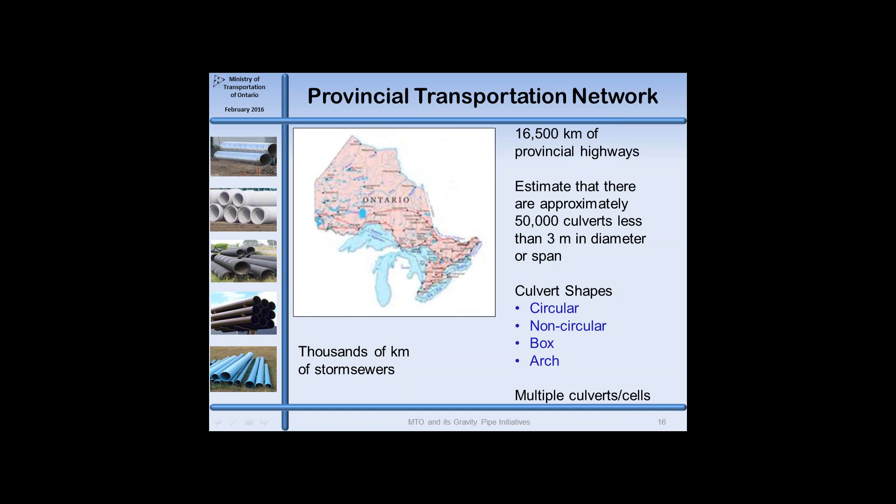From our perspective, what we saw in the past—and I'm going to be talking from about 2002—we started having some issues with pipes across the province, regardless of material. For steel pipes, we were seeing corrosion, deflection, buckling, collapse, and similarly with concrete pipe, we saw cracking and the odd spalling issue, as well as breakage from other pipe products and buckling. Some of the work done at the inlets and outlets was not done in context of looking at what the hydrostatic uplift forces were, and so we had some buoyancy issues with uplift.

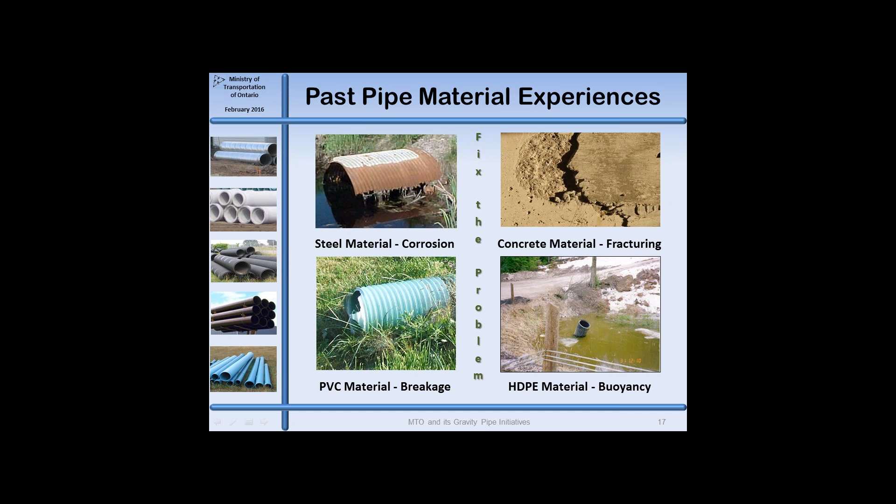Running through quickly, a timeline of the past decade or so in which we've been working in our gravity pipe area: in 2002, as I was starting to say, we identified a number of problems with certain steel and plastic pipe materials, and at that time, senior management at MTO put down a moratorium on the use of these particular products until we could get more information. Later in 2002, the plastic products were permitted for installation again, and in 2003 was the first study we put forward to start developing our gravity pipe design guidelines.

In 2005, our first step of implementation was an interim implementation in 2006, and at that point we started permitting steel pipe use back on our highways. In 2007 we went through the process of implementing the full gravity pipe design guidelines.

Along with that, for those involved in contract preparation, we also introduced contract specifications. We had new construction specifications, material specifications, as well as new coding we could use on contracts to ensure alternative options were available to contractors and easily understood.

In addition, in 2008, we developed a series of highway drainage design standards, dealing with anything from surface drainage requirements to storm sewers, culverts, and also bridges and stormwater management works.

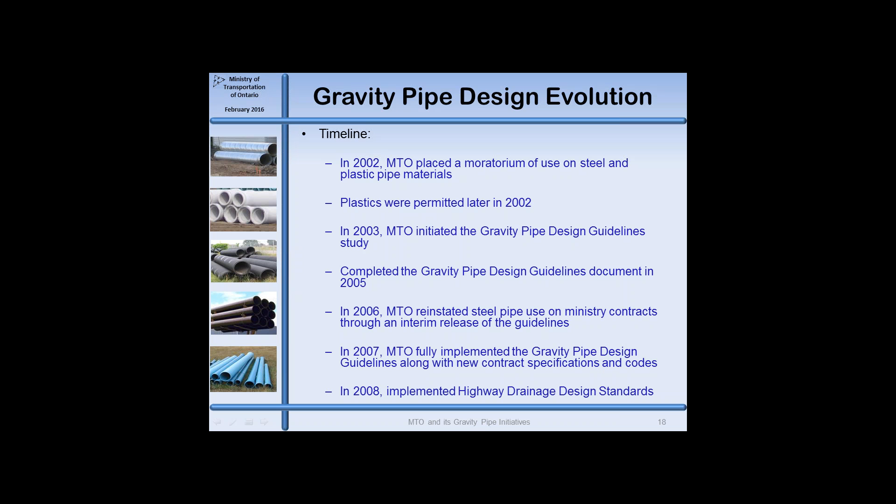In 2009, we went a step further and introduced certification requirements on all pipe materials. That was our first step to ensure we were going to get quality products.

In 2009, we also started looking at, okay, we have installation happening, but how good is the installation? So we developed installation acceptance standards.

We went through a study in 2011, looking at new information and new science that had come forward in the gravity pipe design area, and we did revision work to our gravity pipe design guidelines, finishing that in 2014. We implemented them fully in 2014, along with some revised contract specifications, material codes, etc.

In 2015, we started another study, dealing with gravity pipe trenchless rehabilitation installation. This looks at trenchless installation methods in addition to our open cut or direct burial applications that we currently follow.

What I will do now over the next hour or so is go through in a little bit more depth and detail on some of these initiatives.

When we first started looking into the whole gravity pipe work, from the full infrastructure point of view, we identified certain fundamental building blocks. We felt that if the right designs could be produced, the right products specified, used and installed properly on construction contracts, and ultimately the right maintenance performed on these installations, we would have something fundamentally sound.

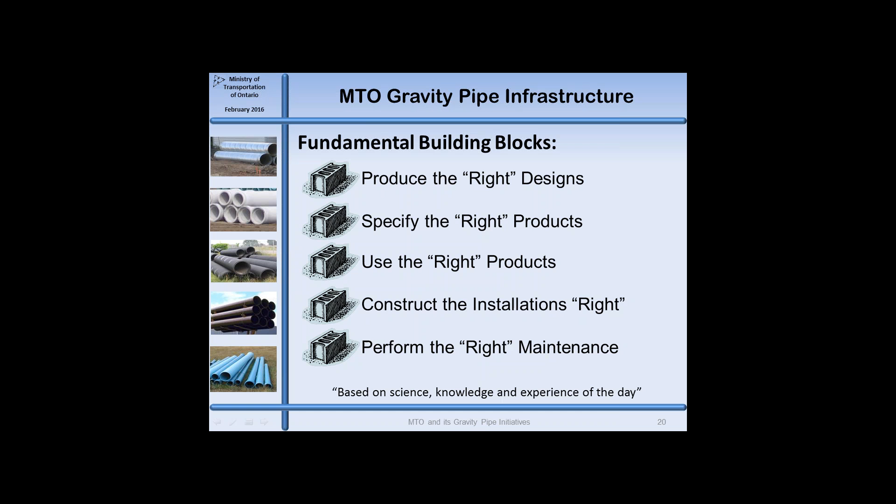So if I look at the way we were doing things pre-2007, remembering that 2007 was the first time we implemented our gravity pipe design guidelines, when I looked at the design quality block, there were certain key ingredients that came forward: our design service life, hydraulic analysis work, joint evaluation on our systems, estimated material service life, structural analysis, and any unique factors applicable to a potential site.

If you look in the second column here, which says past, pre-2007, you can see that there are some blank squares along the way. These are blank because either the work was not being done, or the activity was not being done, or if it was done, it was very inconsistent. Some projects or contracts did have it done, others did not.

When we did hydraulic analysis work, we would pick one pipe type, being smooth or corrugated inner walls, and the analysis was done based on that particular pipe. Our designers were not doing any type of structural analysis - that was left to our contractors to ultimately decide the strength of pipe required to support the highway infrastructure. Unique factors were hit and miss; sometimes they were looked at and other times they were not.

Once we moved into our contracts, we found that most contracts were putting forward that contractors would have one pipe material to install, so there were no alternatives being offered. From a certification point of view, concrete pipe materials were being certified while all the others, if certified, was done on a voluntary basis, but it was not a requirement for our contracts.

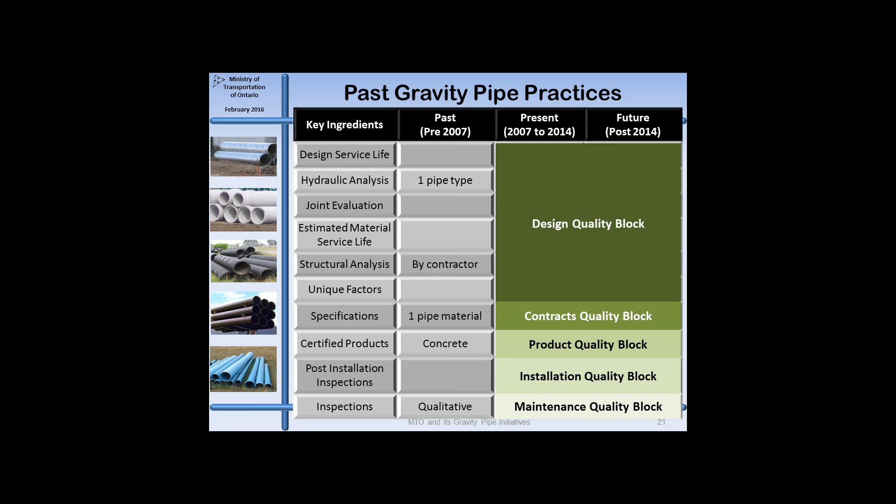Taking a quick look at SD1, this depicts the design flows for all our surface drainage systems. Based on the functional road classification on the left-hand side of this table, depending on what kind of road we're looking at—whether it's a freeway, arterial urban setting, collector, local road, or depressed road—and our drainage system type, we design for minor systems and major systems.

In most cases, our minor systems are 10-year design flows, and our major systems are 100-year design flows, with the exception of depressed roadways, where 25 years is the minor flow design. These were put forward as the level of risk we are willing to take on our infrastructure in order to maintain continuity of traffic flow and maintain as much as possible a safe environment for our traveling public on our highways.

The fundamental use of this particular type of drainage system is really to collect and move water off the surface of the highway and on into receivers.

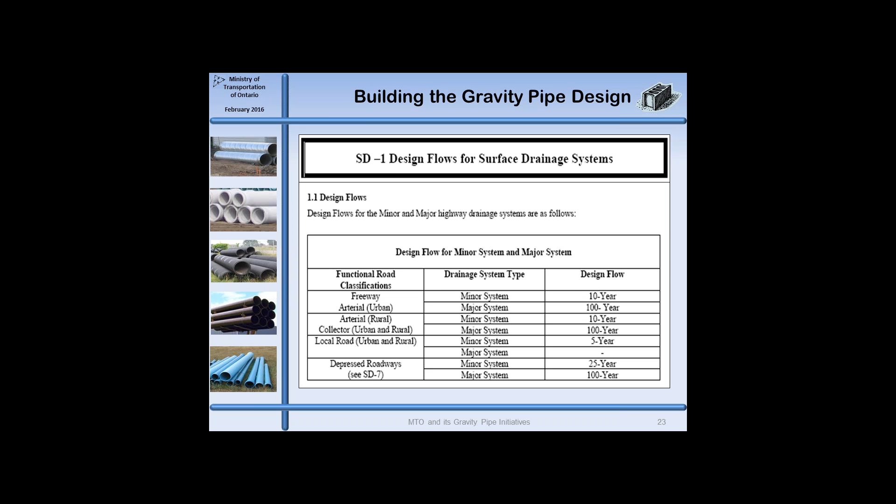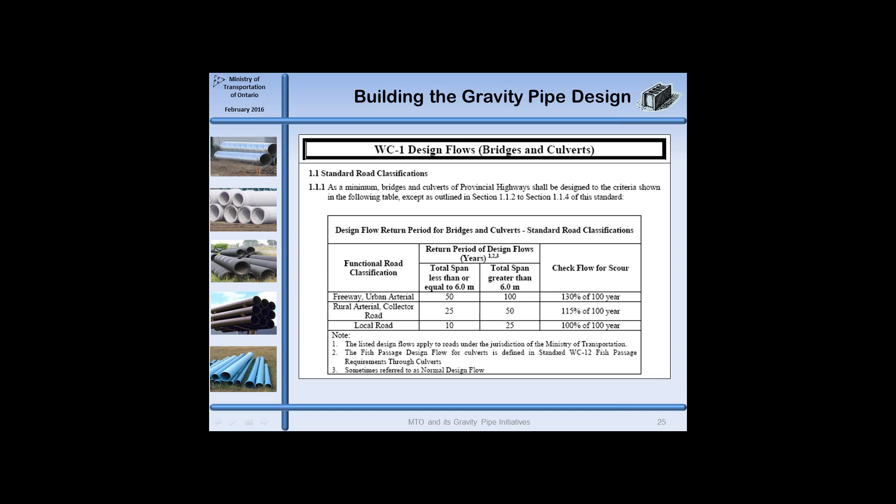That will come into play a little bit later on, and this is really to look at the pressure flows going through our culvert crossings, so we can look at potential hydrostatic problems with the culvert at the inlet or outlet, as well as the migration of waters outside the pipe walls through the embankment rather than through the pipe itself.

In 2007, as I said, we introduced the MTO gravity pipe design guidelines. It was done over a couple of years of development work in which we researched a lot of the available information and practices being done by other road jurisdictions, and came back with a complete set of guidelines for designers to follow with all our highway applications.

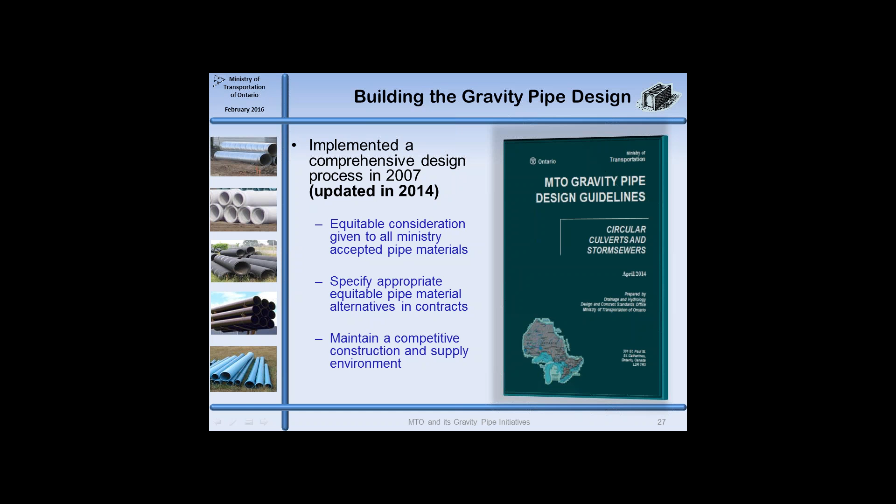Highlighting the design process itself, it goes through basically 8 steps. The first is really trying to set up what's really needed or required at a project. From here, designers will start looking at various elements of the project to set, for example, the DSL, our design service life, and other criteria.

Pipe size and type availability reflects commercially what's available for our choice to address the hydraulic conveyance requirements at any given site on our highways. Each of the pipe materials have various types of joints available, and depending on ground conditions, groundwater conditions, etc., some choices need to be made here.

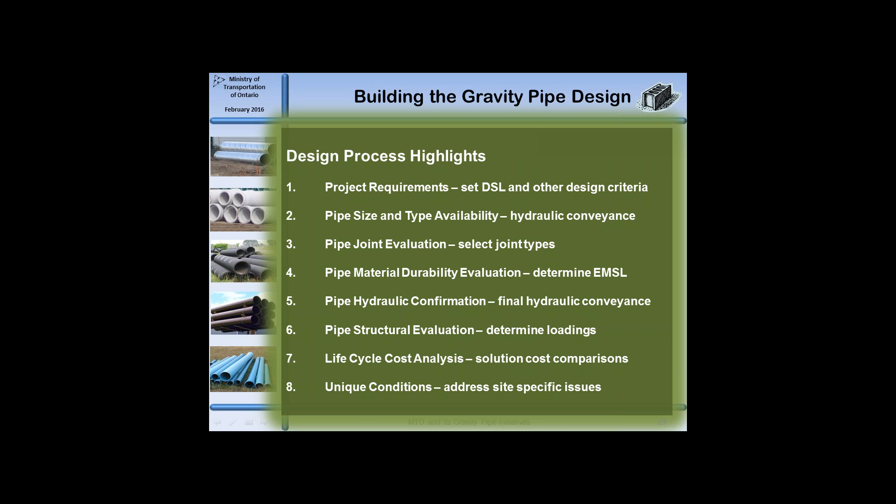Life cycle cost analysis has been introduced so you can do solution cost comparisons. Finally, writing a document like this, it's very hard to envision every type of situation we're going to run into. So designers in the end will also have to take a look at whether there's anything unique or very special to a particular site that needs specific addressment that the gravity pipe design guidelines process did not cover in itself. So, highlighting that, that's just the process.

There's also a flow chart in the gravity pipe design guidelines, which takes one step further to define or give a better indication of what's required at each step of the way. As you follow through, there are decision points: is this pipe suitable or not suitable? If not, we're not going to consider that particular product any further, and we keep moving forward with those that are suitable. Given there are a number of different pipe materials available for consideration at the beginning of the process, it's an elimination

decision process along the way from that point on. If the pipe material can deliver, it continues through the process. If the pipe material cannot deliver to a certain element, it's eliminated from further consideration. So by the end of the process, we have a complete list of all those products that are acceptable for the installation at any given site on a highway contract.

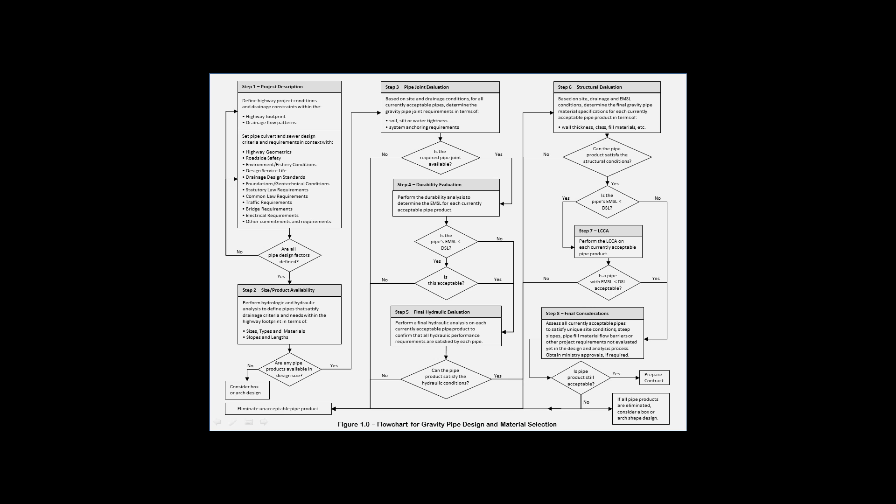Going a little further now into our step one, the designers start off with some sort of functional highway configuration, and that may be 2 lanes versus 4 lanes versus 4 lanes with a median turn lane, a divided highway cross section with a median barrier, or divided by a median ditch, urban versus rural cross section. They take all these things into account to start determining whether it's going to be serviced with storm sewers, drainage ditches and culverts, or bridges and so on.

We have in place, from a ministry's policy perspective, what we call Directive B14, our drainage management policy document, which outlines our requirements under statutory and common law. As our designers put the system together, they follow the direction from this directive to ensure that we do not compromise or cause undue hardship on other landowners upstream and downstream.

We already talked a little about our highway drainage design standards, which give us the design criteria for all our storm sewers, culverts, bridges, etc. Design service life, functionally, we're looking at 75, 50, or 25 years, and it comes back to the designers to look at the context around which design service life is what we're trying to aim for.

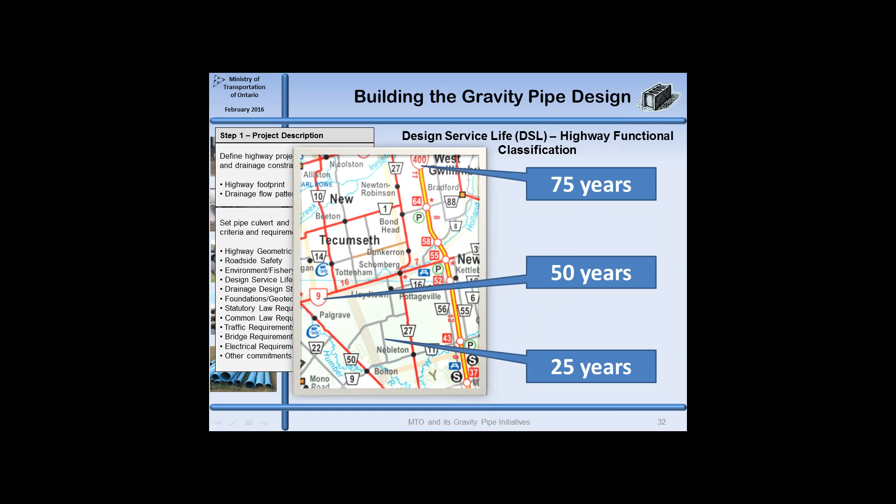First step in the process of the pipe materials is determining which pipes are going to be considered. We've looked at it from the different material side - concrete material, steel, high-density polyethylene, polyvinyl chloride, polypropylene, and aluminum alloys. These are the materials that, given the industry standards, are all applicable to either culvert or storm sewer applications under highway conditions or other local conditions, our interest mainly being the highways.

Within each one of those particular industry standards are specified other parameters with each pipe material: size, type, and class. Size is relatively self-explanatory. Type, we're really looking at two types of pipe materials - it's either a corrugated inner wall or a smooth inner wall.

From there, the class is really the material specifications. So you can start seeing that we have reinforced concrete, non-reinforced concrete, different wall thicknesses. With steel, we have wall thicknesses as well, and protective coatings of galvanized, aluminized, polymer coated, or laminated. With plastic pipes, we're moving more into stiffness, ring stiffness constant, or dimension ratios. And with the aluminum alloy product at the bottom of the table, we're looking at different wall thicknesses available.

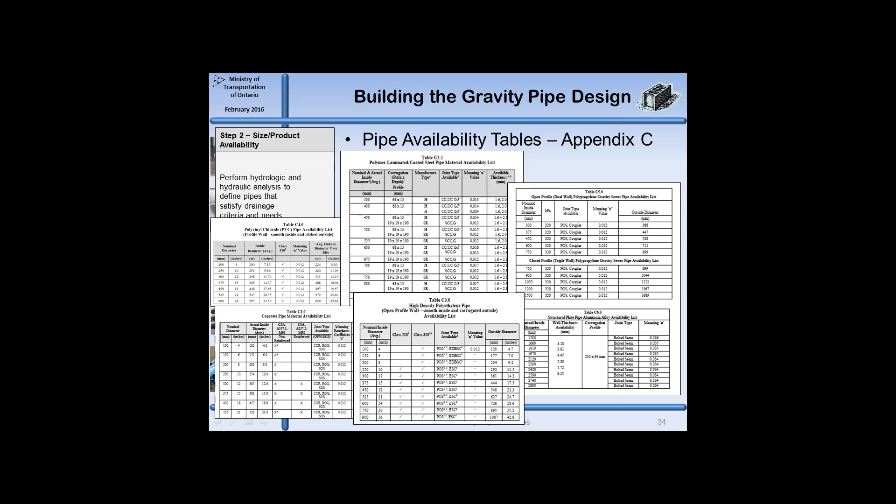So as I said, the initial hydraulics is really looking at the size and tolerance. With the different materials, you can see that we're looking at smooth or corrugated. Steel has both smooth and corrugated available, while the rest are all smooth with the exception of aluminum alloy, which is a corrugated product. Based on slope and length, we're now able to start zeroing in on the size requirements of the pipes and materials that we accept and are available for use on contracts.

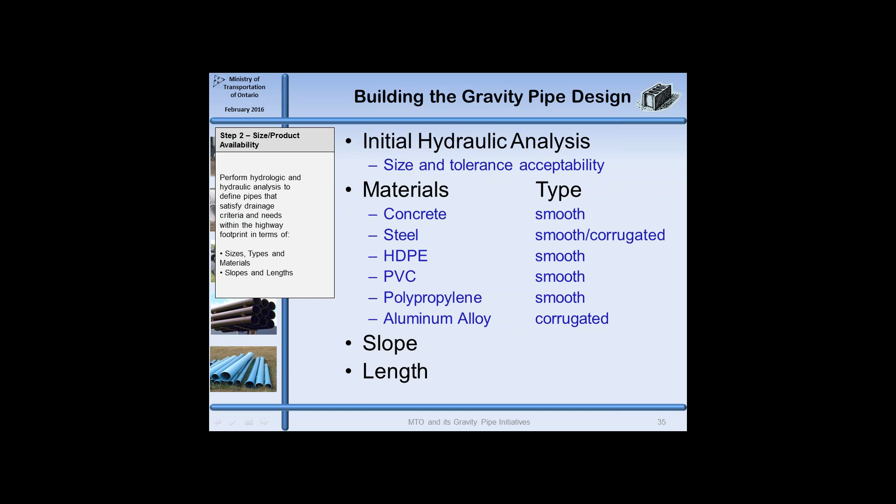Joints were the next step of our evaluation process, and based on different site conditions, you make a selection as to the type of joint that's needed. We also went through the types of joints available from every pipe product and have been able to categorize them into 3 different types: soil tight, silt or fines tight, and leak tight. The suitability of each of these different types of joints really comes about based on the site conditions encountered or the type of fill material used.

So soil tight is pretty much used in areas where your fill material is coarse with a small percentage of fines, and exfiltration or infiltration of water is not an issue. Again, where it's not an issue but you have a high percentage of fines, you can move over to silt fines tight. And finally, if infiltration of materials or water is an issue, you move to leak tight.

What we have in our process is set up so that if a soil tight joint has been specified on a contract, that's not to say that if the contractor wants to put in a pipe with silt fines tight joints or leak tight joints, that's also acceptable—unless it's been specifically stated by the designer that it's not. We'll talk a little more about that.

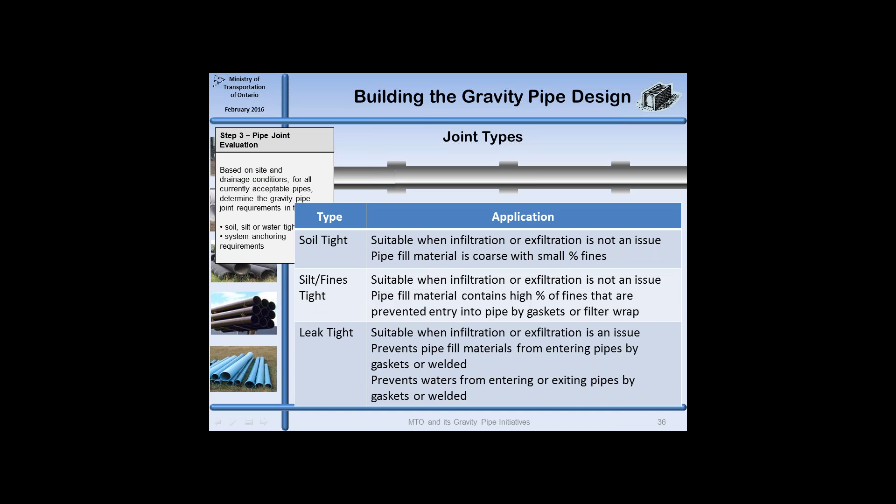Within the gravity pipe design guidelines, we again have tables available so that you can look at the different pipe materials, the different types of joints available, and what they're actually classified as—being soil tight, silt tight, or leak tight.

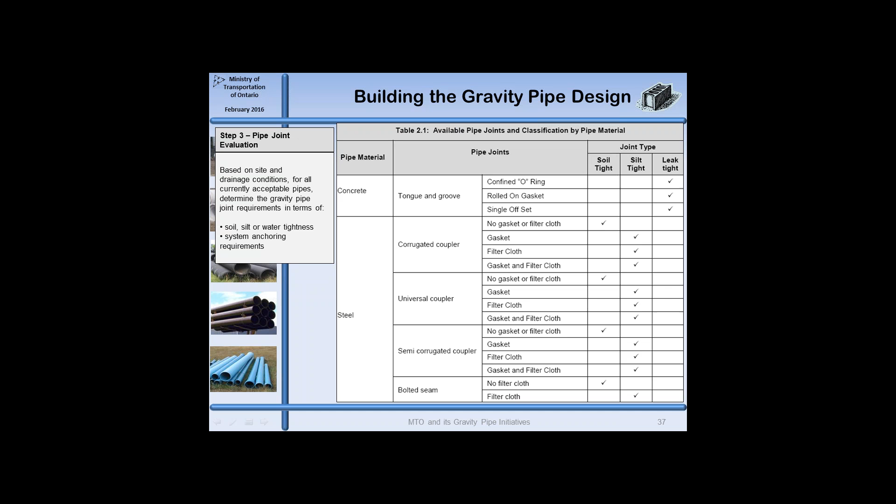Keeping in mind why the joints are there, really it's to connect the entire system, and it's going to go through some different stresses and strains as well. So really you're looking at joints that are going to provide either some resistance to something, or allow accommodation of something else.

We want to keep the pipe sections together so the joints should be able to hold every section in place. We also want to make sure it's held in place so we can maintain hydraulic continuity throughout the system. If we start having offsets, the flow regime changes, and that could have implications at the outlets.

We also want to be able to accommodate any lateral or longitudinal movement so we can prevent certain structural problems. Sometimes if we're too rigid, we may be causing further problems. If we're too slack or too flexible, we may have aggravated problems as well. So the designers need to be looking at that.

Finally, with the resistance or accommodation, you start looking at, well, if we put a storm sewer system in where the groundwater may be slightly high, we don't want to have it functioning as a tile drain and start dropping the groundwater table in an area. It would have certain environmental implications.

If we're within source water control zones, again, it's sourcing water for private well applications. We want to make sure that the waters in our area do not contaminate those sources.

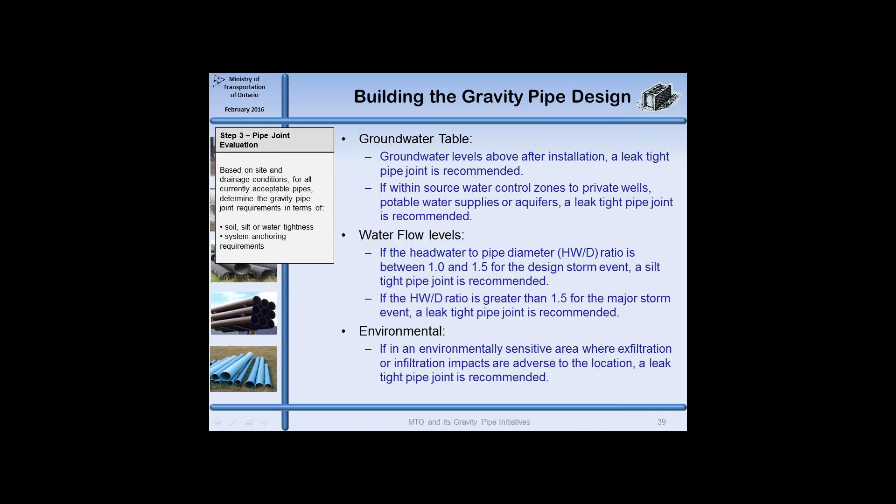Having gone through the process now, we have pipes that are of adequate size to deal with the hydraulic conveyance requirements. We've also looked at the various types of joints that we need at the site and have picked pipes now that are able to deliver to those requirements.

So the next step of the process is looking at these particular materials and the effects that are going to happen on them as far as durability. In other words, we're trying to estimate how long the material will last from an estimated material service life perspective, and whether or not that will exceed the design service life set up for each of the different site locations on a highway contract.

Various factors affecting corrosion could be the water chemistries or soil chemistries or other agents, solvents. Mechanically, there's abrasion factors, humidity and temperature potential, and the material composition to some extent as well. This is all discussed in Chapter 7 of our guidelines.

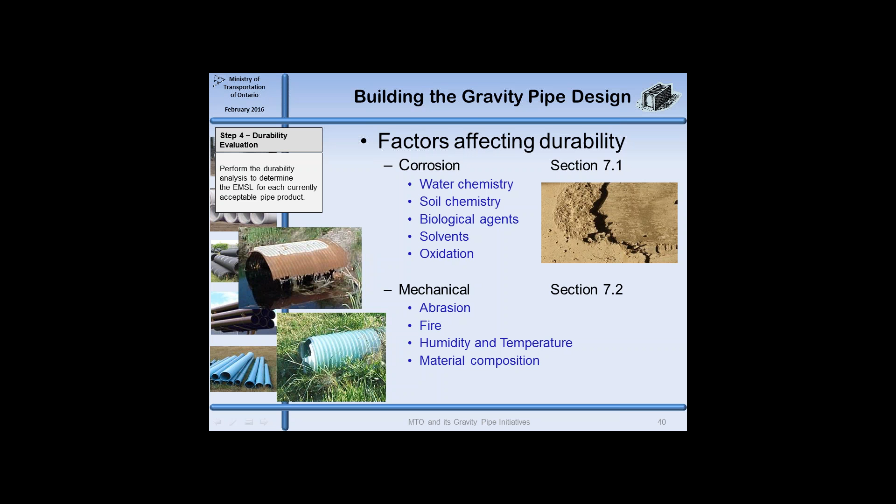Throughout Chapter 7, with the different materials, as you can see listed on the left column, our estimated material service life is either calculated or has been assigned based on information that we were able to gather. We provide guidance throughout the document through narratives, charts, equations, graphs, etc.

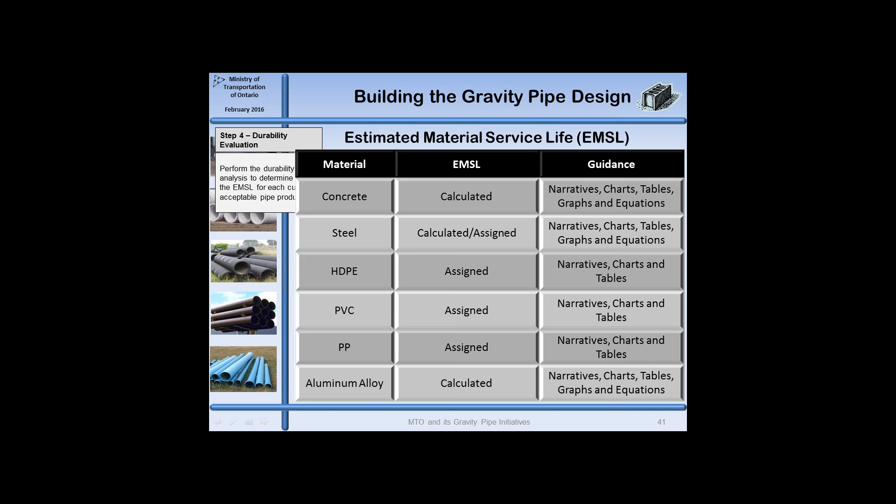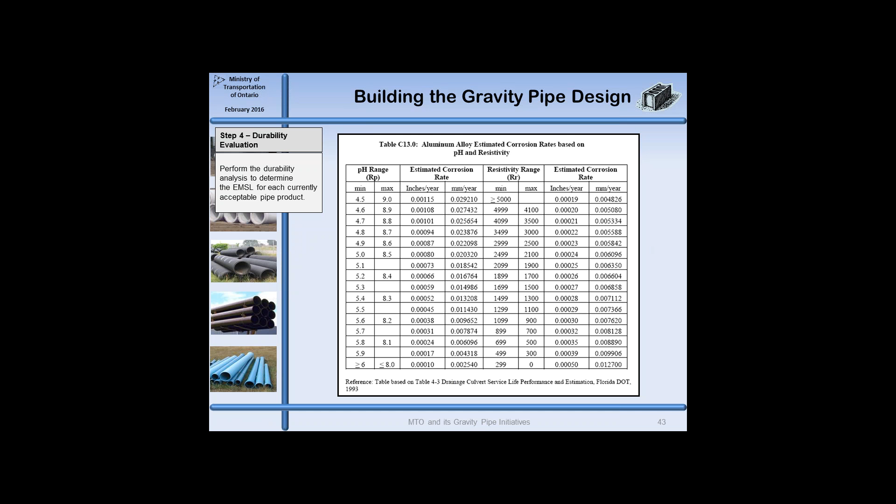This is the table for aluminum alloy, and we have estimated corrosion rates based on pH or resistivity. On the left we have the pH ranges and the estimated corrosion rates per year. On the right-hand half of the table, it's resistivity based, again with estimated corrosion rates. Given your pH and resistivity, the greater of the two corrosion rates would be used and applied to your material thickness to determine if this thickness is good enough to reach the design service life, or if you need thicker pipe material walls to deal with that.

So up to this point, we were able to carry all the different pipe materials with their various coatings and thicknesses forward. Now, through durability, we're starting to narrow those down to the types of materials required to deliver the potential of the DSL requirement.

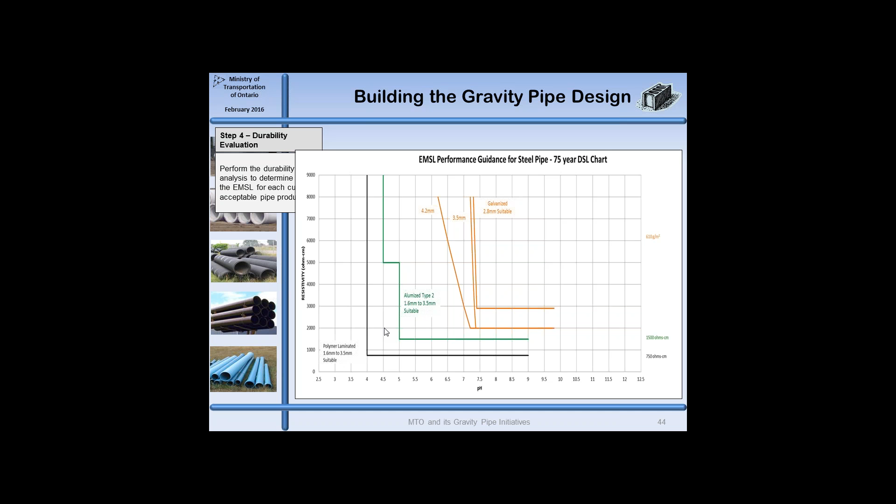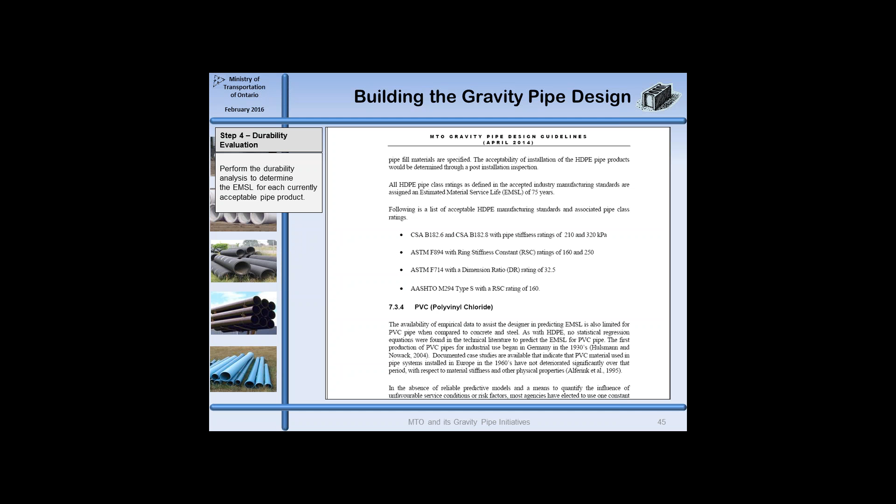The plastic products like HDPE, polyvinyl chloride, or polypropylene, based on the materials themselves and the science behind their composition, have the ability to meet 75 years. We were able to recognize that these all had good potential of making 75 years. These have been assigned 75 years and are suitable for pretty much every application on our highways from a durability perspective.

Within the document, we also provide the ability to use equations to calculate the estimated material service life. For concrete, we have four different models: the ODOT model, which is widely recognized and accepted throughout the industry and road jurisdictions, the Hadipriono model, the Hurd model, and the Florida model. These are all discussed in more detail in the guidelines in Chapter 7.

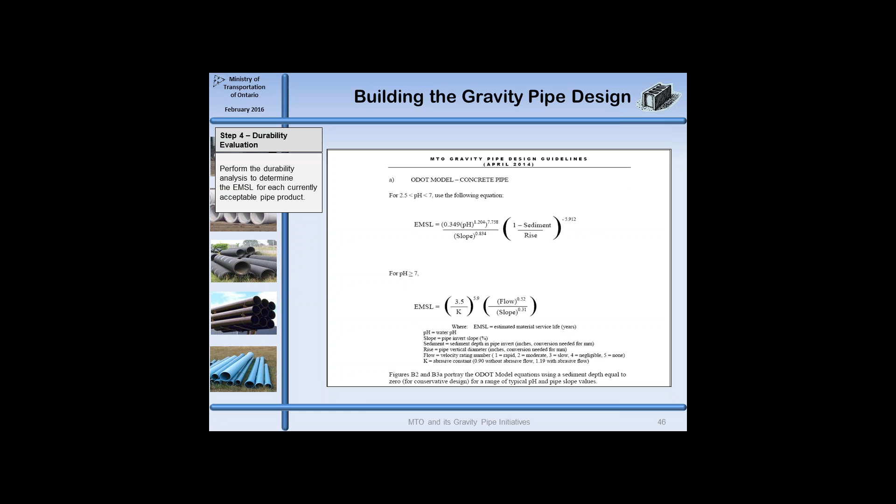What I'd like to bring out here is some additional information brought forward in the context of soils and rainfall. It helps you do a bit of correlation between what you're seeing from sampled pH, resistivity, hardness, or other environmental parameters, and correlate that back to the historical performance of a pipe that may have been in that location.

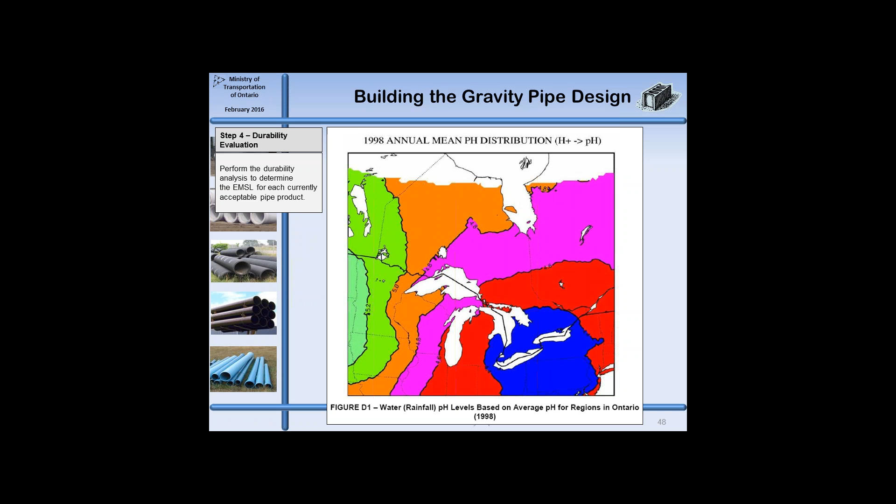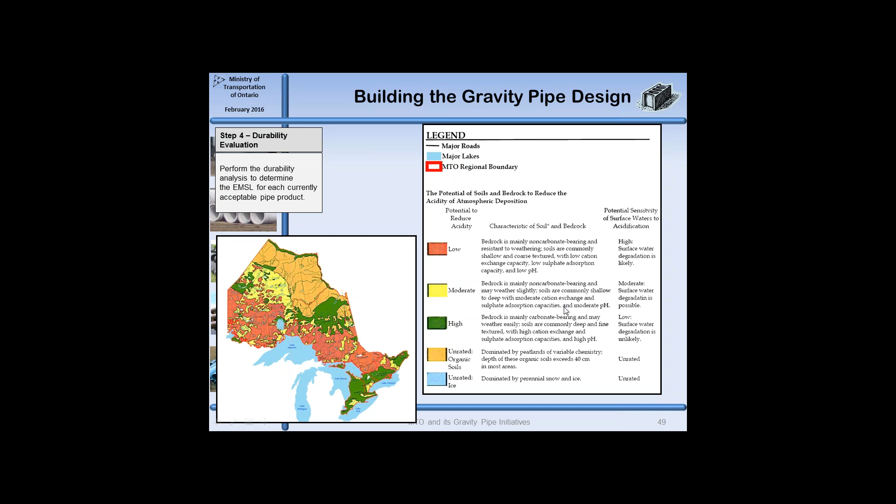So now that we've gone through the process, we have suitably sized pipe based on our initial hydraulic analysis, we have the joints, and we have the durability factors played out as far as materials go. We've been able to reach certain specifications so that wall thickness of certain pipes may not be suitable. These were eliminated along the way. So we've been eliminating non-suitable pipes all through this process.

When we reach the final hydraulic analysis aspects, as I mentioned before, there is a range of sizes available. If you pick the 1,000 millimeter category, there are various sizes available, and do they all act the same way hydraulically? For a culvert, we may have to look at low flows for fish passage requirements, and moderate flows from an erosion perspective downstream.

We have our design flows, as noted from our design standards, which could be anywhere from 25, 50, 100 year, 10 year for storm sewers, or 25 year for depressed roadways. Major flows that we have to look at are the 100-year or potentially our regulatory storm levels. We also have check flows for scour analysis, done at our culverts. This is the type of final hydraulic analysis we're looking at the designers to do prior to moving on into the structural assessment component of the process.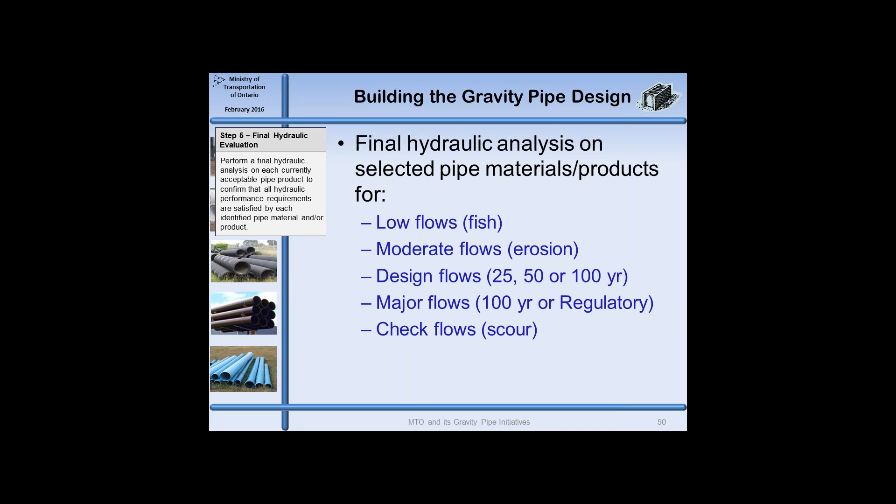So for all our designs where they have to do any regulatory analysis work, these are the regulatory storms that they would actually input into the hydraulic analysis component to look at overtopping relief flow aspects on highway crossings at bridges or culverts.

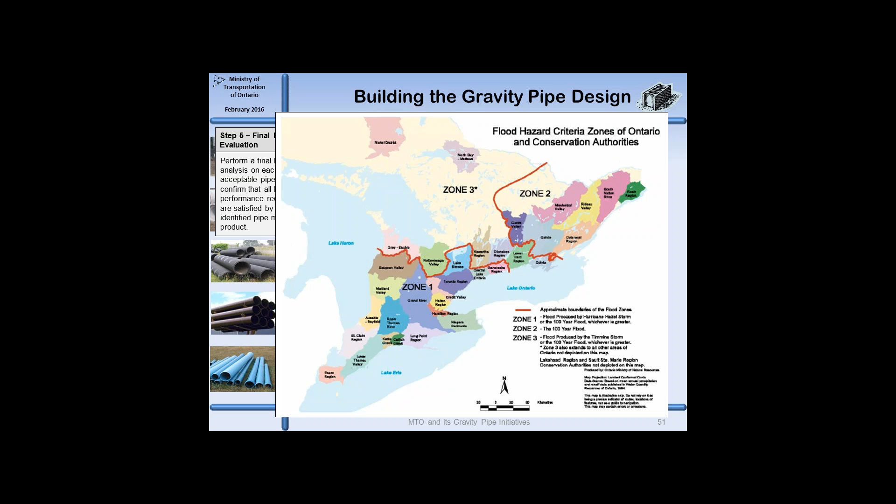Moving forward into the structural component, one of the things we found when looking at these contract specifications was that they were specifying rigid pipe and flexible pipe. Rigid pipe, in the context of designers, was any pipe with a smooth interior inner wall. Flexible pipe was anything with a corrugated inner wall. In the context of the materials themselves, rigid pipe is anything that cannot deflect more than 2% without cracking, versus flexible pipe, which can deflect more than 2% with no cracking, and will actually be able to deflect more than that 2% level.

So really when you look at a rigid pipe, it's the concrete material versus the flexible pipe, which is our steel and plastic products. In the context of installation, with rigid pipe we're looking at 3 distinct layers when contractors perform their backfilling operations: bedding, cover, and backfill, versus flexible pipe installations, which really have only 2 layers, the embedment layer and the backfill layer.

Our designers at the time were never specifying exactly what type of materials were needed for the bedding, cover, embedment, or backfill. This was all left up to contractor choice based on some level of input from the foundations area. A lot of times what we were seeing is that the bedding was not appropriate or the cover was not appropriate, and thereby we were having some installation issues and the culverts were not operating to our expectations. So we moved this forward into the design area to make sure our designers are actually looking at this and making some design decisions based on the requirements of the site.

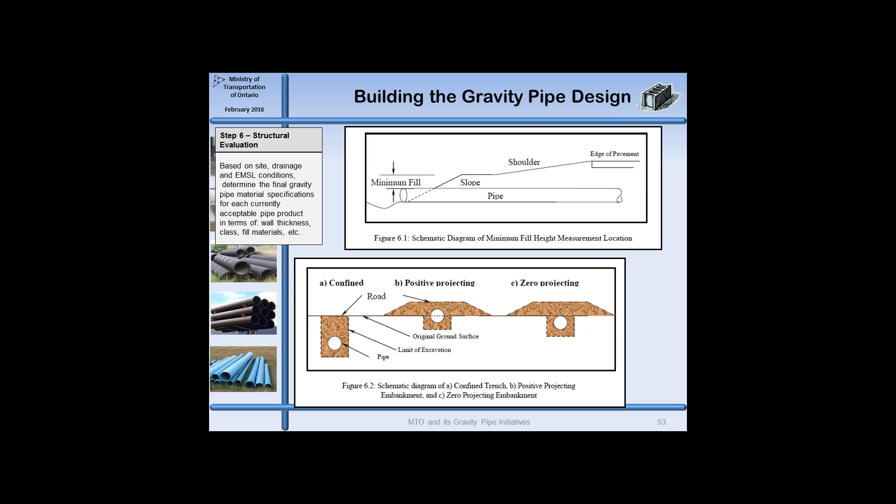We've gone a few steps further over time and have started looking at the way the distribution of loads are going across the pipes. What we're really looking at is, with any structure or infrastructure location, can we see what's the lowest level of fill that's going to be at the site, or what's the highest level of fill that's going to be at the site. We can then take a level of analysis on that, determine if we have enough fill to support not damaging the pipe, and whether we have too much fill that the pipe cannot support, requiring something different to support that.

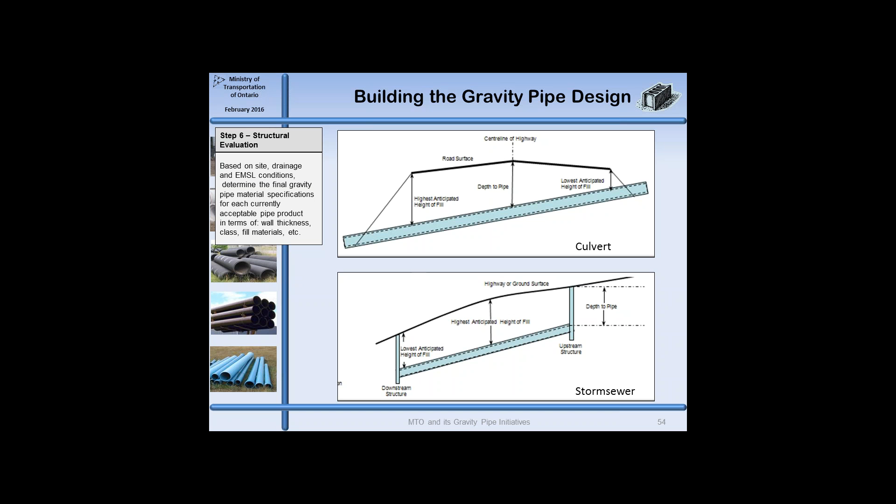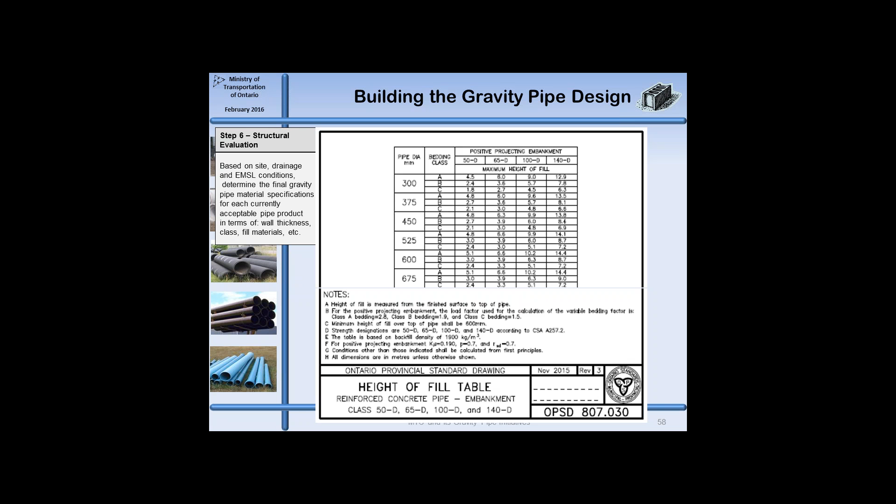Having gone through all of this and come down to a point where we have all our suitable pipe materials able to satisfy the hydraulic criteria, the durability criteria, joint criteria, and the loading criteria, we can now look at whether or not a life cycle cost analysis is needed.

What we found in our analysis really came down to the cost of one-time pipe installations compared to what we call pipe replacement or rehabilitation strategies. With a one-time pipe installation, we're looking at all the suitable materials that have come forward as having an estimated material service life (EMSL) greater than or equal to the design service life (DSL), versus pipe replacement or rehabilitation strategies, where select materials probably have EMSLs less than the DSL.

So we could look at potentially putting in pipes with a 25-year service life into a 75-year design service life situation. This would require 2 replacements. We can cost that out to see whether it's more advantageous versus a one-time installation. Another option may be to put in a pipe product that allows us to insert a liner in the future, giving us opportunities to deal with that particular site differently down the road.

This way, we're trying to get our designers to look more proactively into the future, to see what will happen when we get 75 years down the road. So we start making some earlier decisions, where we can look at larger pipes potentially, and set up the construction or installation of the product in a manner that allows us to employ another type of technology to put a new pipe in place.

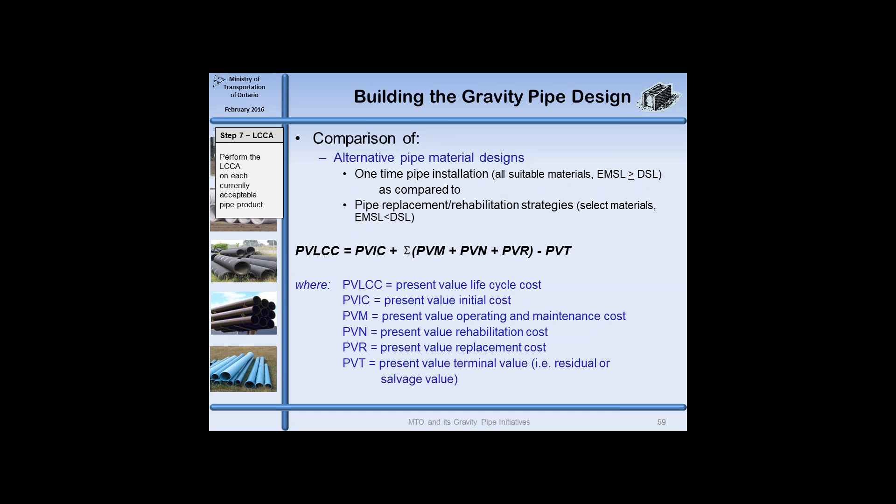So up to now, what I've pointed out is that the gravity pipe process gives our designers a systematic design process, one they can follow that highlights the different steps or tasks needed along the way to ensure they come out with suitable products at the end. These standards and criteria we've put forward ensure that we try to look at all the risk associated with it to the fullest extent possible that's available to us today.

What I'll also say is that this only provides designers with the minimum material specifications for each acceptable pipe type and/or product and material. So what we're really looking at is a process focused on getting designs that are reasonable and cost appropriate to the best extent possible. What it does not do is address certain unique site or project situations that are encountered. We cannot address everything, and we have to leave some of it up to the design team to make decisions on.

The system anchoring requirements really depend on slope steepness. We started seeing that pipes on 20% slopes really require a little bit of support anchoring in order to ensure that they remain in place over time and also to maintain connection stability.

In some of the problems that we did see on some of our sites was the piping phenomena happening around the outside of the culverts or the pipes. What we're now asking the designers to also look into is whether there's a need to prevent water migration around the pipe, in terms of clay seals, anti-seep collars, cut-off walls, and buoyancy factors, head walls maybe, or wing walls, in order to keep the pipes in place and not subject to hydrostatic uplift forces.

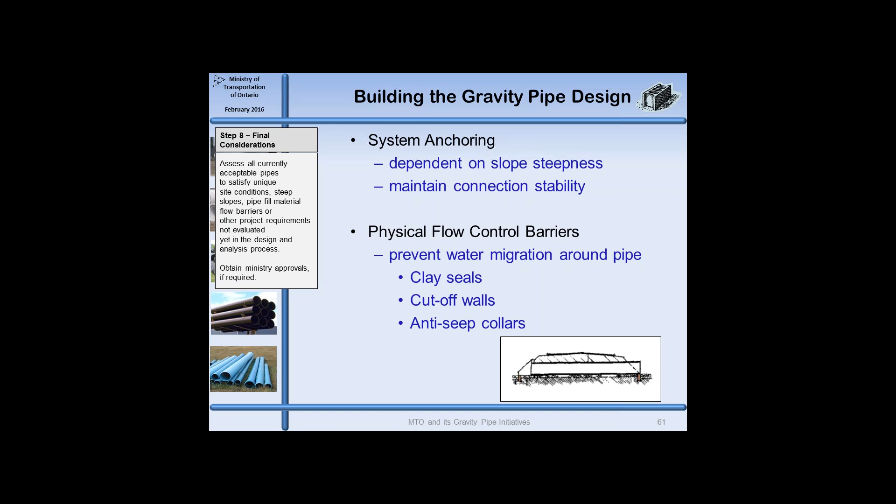How we've been dealing with the requirements as far as head office type approvals, in a lot of cases there are unique situations encountered right on the site. This might be in terms of fish passage where you need to put in baffles, and the baffles are a type that are conducive to being put in one or two pipe materials, but not the other two that made it through the process. The design team at this point can also eliminate the other two that are not suitable based on that requirement. It might be that we have endangered species or species at risk, or a human passage requirement. So if a pipe material can't deliver on a certain element encountered on a site, these pipe products are eliminated by the design team.

In other cases, we find that as the design team puts a highway concept plan or detailed design plan together, we may end up seeing multiple options of what they can do at a certain location. The region will, based on costs, availability of getting the work done, or availability of expertise in the area, may decide to go with one option over another. And if an option tends to be material specific as far as pipe is concerned, the design team can make the decision to eliminate those pipe materials not suitable to that particular option.

It might be that we're doing a highway transfer to a municipality. Thereby, we usually bring the highway up to municipal standards prior to handing it over. We would work with their criteria, and the design team would make choices based on those requirements. It may also be a regulatory agency requirement that causes us to go a certain direction.

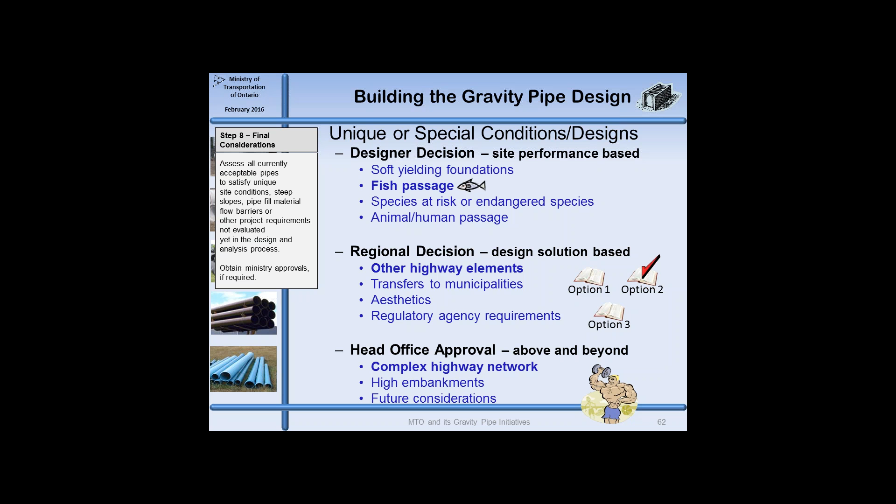So currently, if we're looking at a highway situation where the design team feels that the minimum, because of the complexity of the site, may not be the best here, what we might want to look at is one specific material to give us a better possibility of meeting our 75-year design service life requirement. Maybe the recommendation was the second level of specifications from the pipe product, however there are two higher ones available. Maybe we should go to the higher one right away and be more positive about reaching our design service life.

A decision might also be made to install larger pipes to service it for the time being, so that at 75 years in the future we can insert a liner into this particular location to provide the functional hydraulic requirements at that time. Or it may be construction of a pipe envelope around the pipe installation that would allow a pipe ramming operation or a tunneling operation in future. So there are different ways we're having our design team start looking at where we are going from today into the future.

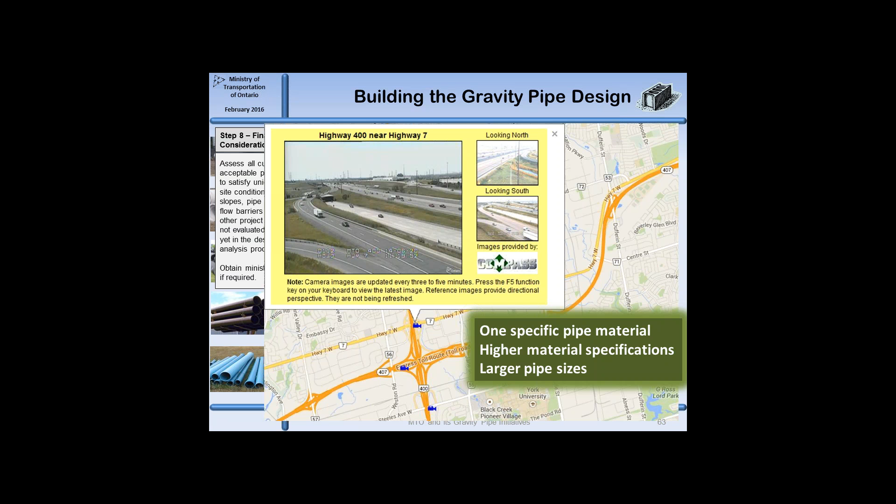So with this, what we end up with at the end of the design process is what I call an equitable alternative pipe materials list. These are all the pipe materials that have come out through the hydraulic analysis, durability analysis, structural analysis, as well as considerations of unique conditions that should be moving forward into the contract for the contractor to put in place. This is the way we actually put pipe material alternatives into our contracts, so the contractor has choice of installing any one of these different materials. With this particular one, we have 22 acceptable products that would go forward into our contracts.

How do we get them into our contracts? Now we're moving to the next block, which is our pipe contracts block.

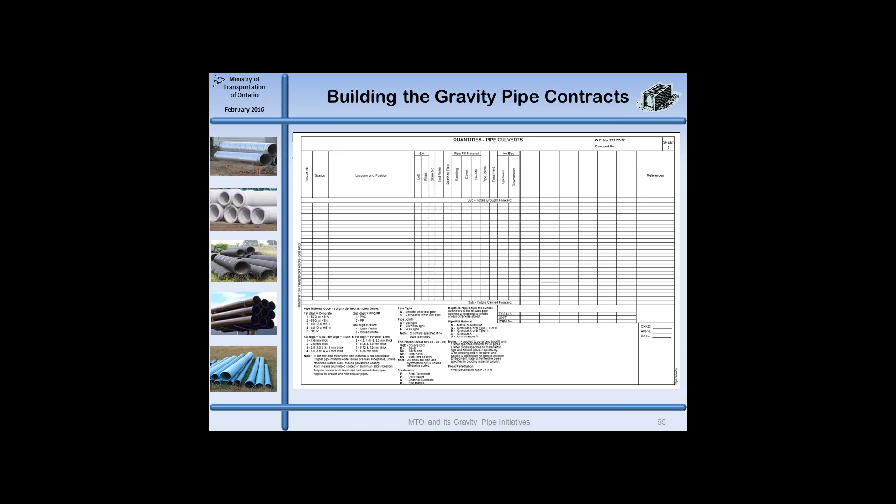In the MTO contracts, what we use are what we call pipe quantity sheets. There's one for pipe culverts. On here we have all our details for the contractor to know in order to install the pipes in different locations: culvert numbers, locations, where it's located on a highway, the skew number, depth to pipe, type of bedding, cover, backfill, joints, treatment, upstream and downstream invert elevations. The actual pipe tender items are located up in these squares on the upper right-hand side of the quantity sheet.

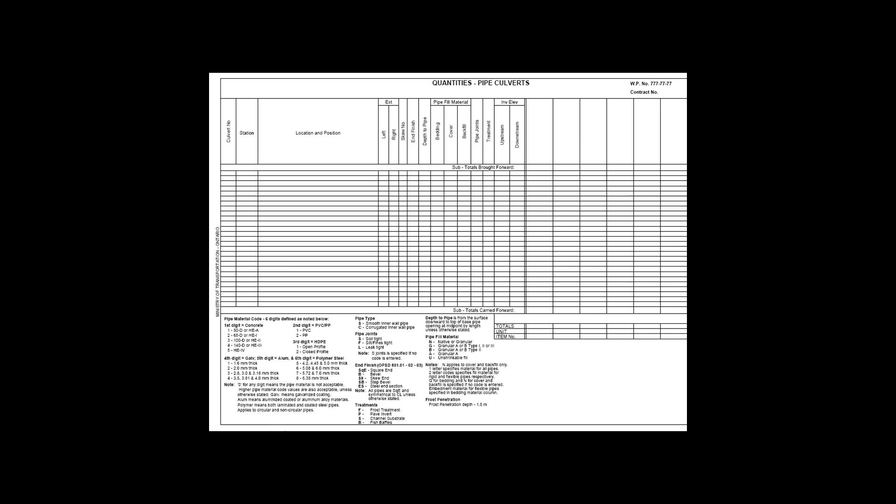On the lower left-hand portion of our quantity sheets, you see these legends. This is the information put forward for contractors to know exactly what is being specified in the contract. We have one here for culverts, and we also have one for sewers. It's all put together to provide the actual details the contractor needs to know in order to install the pipe locations.

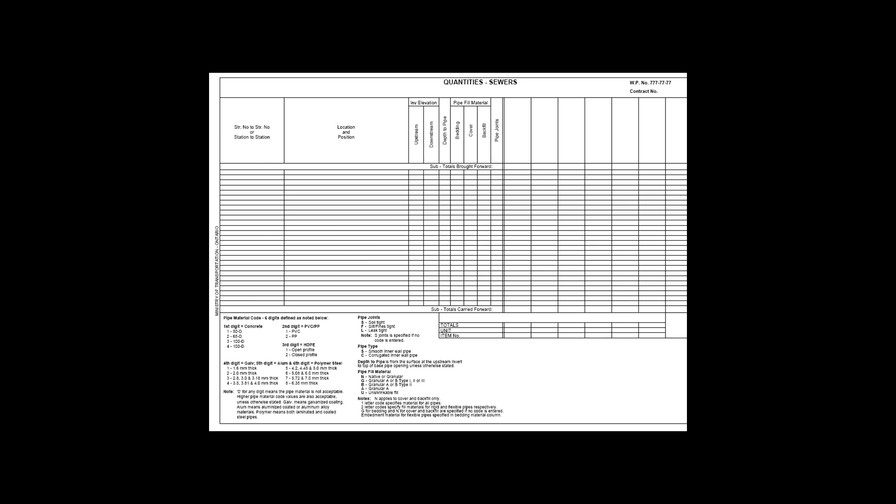Blowing up the code a little more, you can see we have material code on the upper left-hand side with different digits - I'll talk more about those in a moment. In the center portion of the screen, there's pipe type again, S for smooth, C for corrugated. The joints, soil tight, silt fines tight, leak tight, type of end finishes, frost treatment or paved inverts or fish baffles - all this information is put forward to the contractor, as well as the fill materials and different designations for the different types of fill materials we have.

It's also in a hierarchical process for most cases, so if G were put forward as a granular requirement for the bedding, then the contractor has choice of using either granular A or granular B type 1, 2, or 3. You can see the other designations of B and A start restricting it a little bit more for the contractor.

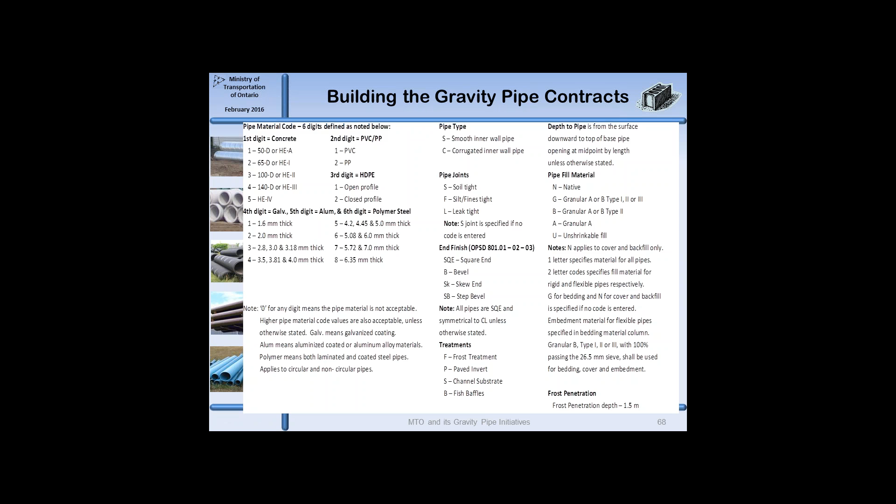They also did the analysis in both a smooth and corrugated situation and deemed that the 1,000 plus 50 corrugated products were acceptable at this site as well. So you're looking now at 1,000 millimeters up to 1,050 millimeters in diameter products.

Just to highlight here, we were able to use the same type of designations with the non-circular pipes. They're not actually addressed 100% in these gravity pipe design guidelines, but the material aspects are much the same, and we have applied them there.

The pipe material code, which is the last 6 digits, each digit represents a material rather than a number. The first digit represents concrete and ranges anywhere from 1 to 5. These digits denote the different D loads for the product: 1 is 50D, up to 140D.

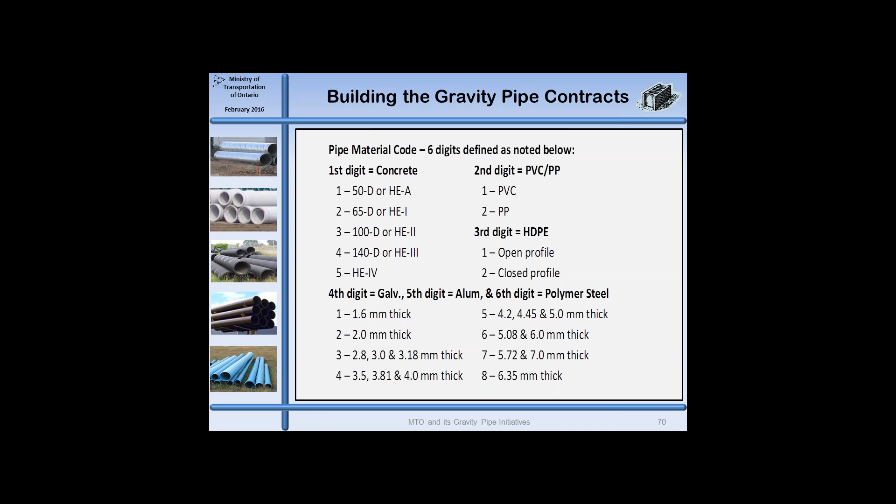The third HDPE value is 2, meaning it's a closed profile pipe only that would be allowed in this location. The fourth, fifth, and sixth digits are 3, 2, 1. Going back, the 3 would be 2.8, since we're talking about smooth pipe at this stage. The 2 is 2 millimeters thick, the 1 is 1.6 millimeters thick, and it's polymer based on the location, which is the 6th digit.

The second line of code for corrugated pipes denotes the material values. Currently, to our knowledge with our design guidelines, there are no corrugated products available from concrete, HDPE, PVC, or polypropylene, so we only have steel products to consider for corrugated, and that coding is put forward there.

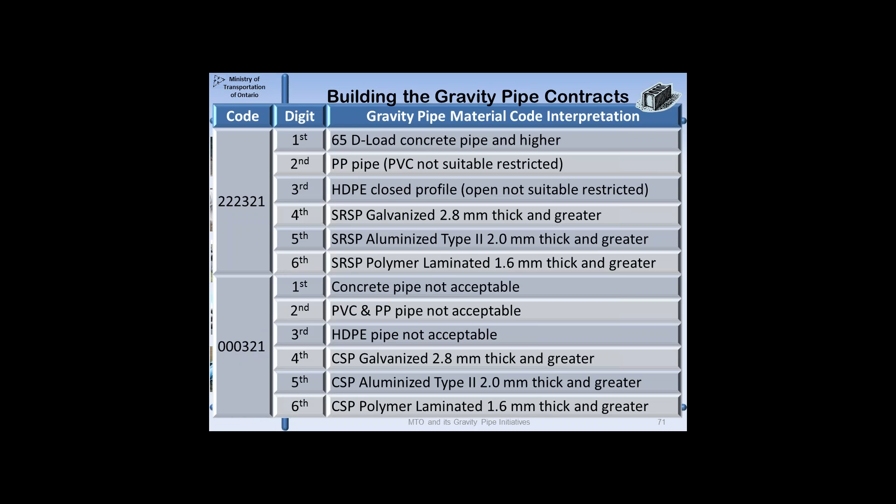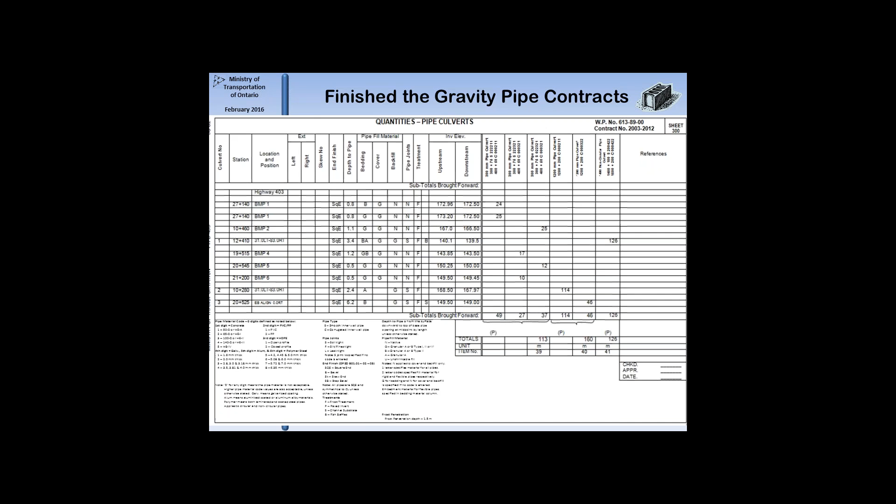Bringing back the pipe culvert quantity sheets, we can see a lot of information goes into these documents. With the depth to pipe, the contractor can estimate the quantities needed for granular fills or native fills, the type of joints, and treatments required — all identified in the legend. It also has the inverts to work with, determining the slope, the various pipe tender items, and the different lengths.

At the bottom you can see these 3 columns are pulled together, which are all the same category but with slightly different material specifications. This is what we call a composite tender item.

The suitability of this way of putting it into contracts is that everyone, contractors and pipe suppliers, can look at these different codes and know exactly what products can be supplied and installed on a contract.

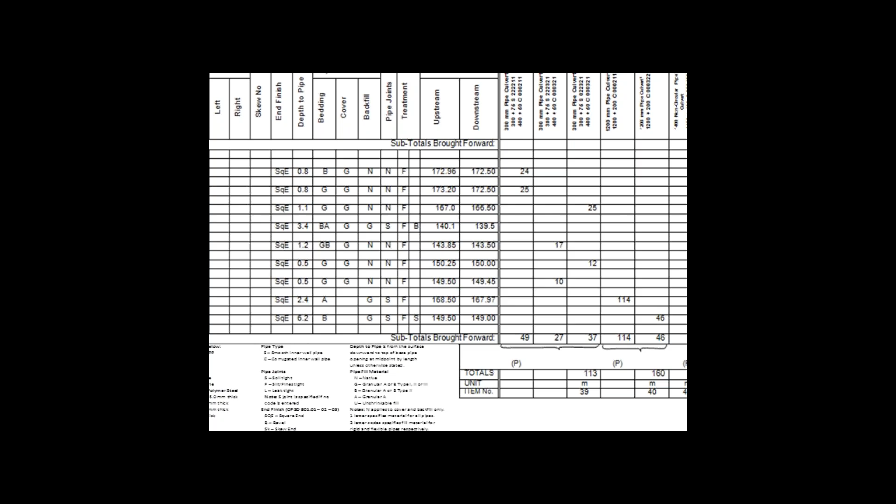In 2009, we moved forward with another step in the gravity pipe infrastructure initiatives, which was certifying or requiring certification requirements on all pipe materials.

Prior to 2009, the only product requiring certification for installation on our ministry contracts was concrete pipe. In 2008, we worked with different industries to determine how certification could work with each type of material, starting with Standards Council of Canada accredited certification bodies. We found there are 4 main bodies in Ontario we can work with for certification of pipe materials: CSA International, NSF International, Canadian Welding Bureau, and Intertek.

CSA does certification of HDPE, PVC, steel, and aluminum alloy products. NSF does HDPE. Canadian Welding Bureau does steel products. Intertek does HDPE, PVC, and polypropylene products. So it's really up to each pipe industry plant to ensure they've received inspection by an accredited certification agency and been granted a license to distribute certified pipe products.

With the concrete industry, certification is already an established process, done as a group with the Municipal Engineers Association of Ontario, MTO, and others — every concrete plant has to go through that to receive certification.

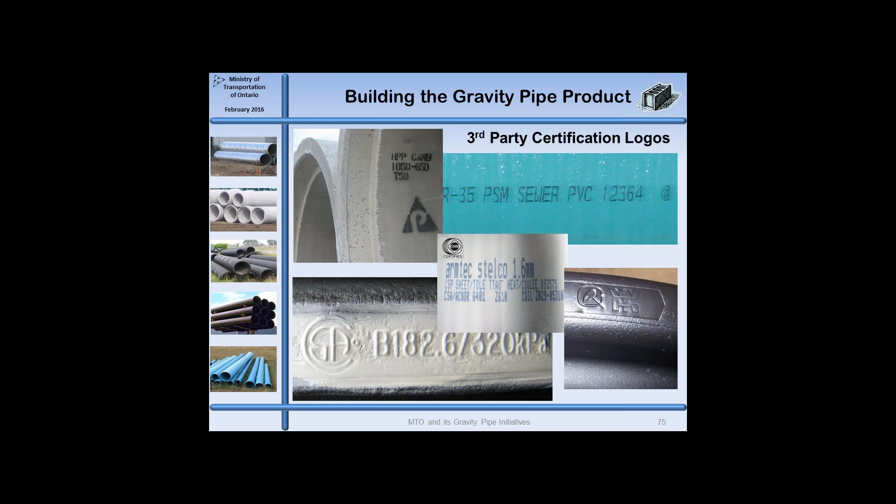As I mentioned in the opening remarks, we also identified that we had some installation problems, that certain times we were looking for different types of installation methods that should have been used but didn't seem to be, and we were seeing failures on our pipe installations because of that.

We brought into play in 2009 what we call our installation acceptance standards. We have 4 levels. One is acceptable, and we do no price adjustment. We have a range deemed as threshold, where according to industry standards of application, the installation should or could have been done up to this level. However, the contractor didn't follow the specification appropriately and constructed outside that level. Not really worthwhile ripping it out, so we impose a weighted price adjustment of 85 cents on the dollar.

From a repair perspective, again, damage to the pipe where the contractor has had to repair it and is not taking it out, we impose a 75 cents on the dollar price adjustment. The main reason for both is that we did not contract with the contractor to put in substandard pipe installations. Slightly substandard we'll live with, but we're not paying a full dollar for the work being done. So this is really looking more at quality of workmanship as done by the contractor.

For a reject, the pipe has to be replaced at the contractor's expense. We do a re-inspection of that particular pipe location, and depending on whether it falls into threshold or repair elements, it would be subject to price adjustments, as discussed at the upper part of the slide.

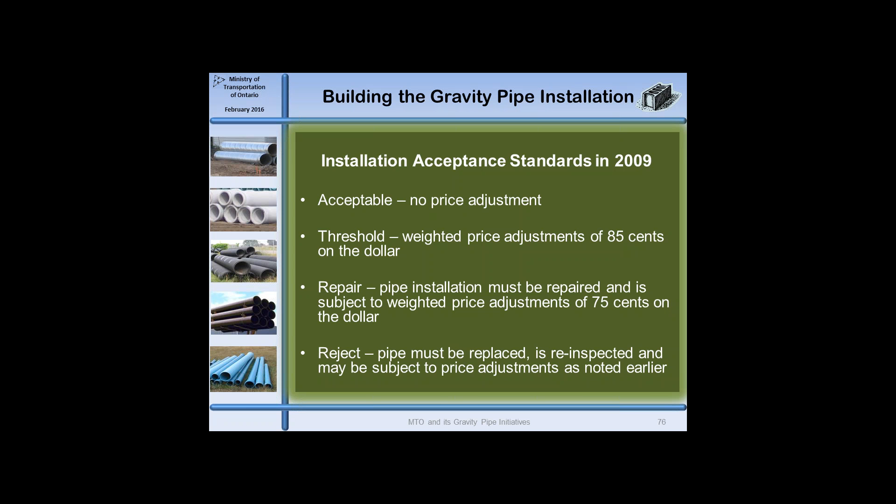This is in our construction specification standard for culvert installations. In the specifications, we have a table of pipe condition codes, the different types of codes. The letters denote something - for example, FS is a spiral fracture on a concrete pipe product, H is a hole in the pipe, and D is for deflection or deformation, depending on the way of measuring the deformation levels.

If the pipes are too big for equipment, it's done by visual tech. We have some standards in place for those. We also have the equipment side and the pipe size. If it's less than 750 millimeters in diameter, there is a threshold range; greater than 750 millimeters, there is again a threshold range and a reject range. But the reject range stops at 7.5% because the larger the pipes are, the easier it is for them to install.

What I will point out here also on our construction specification is that it says OPSS.prov - this is an Ontario Provincial Standard Specification, provincial. This designation is used by the Ministry of Transportation only. Another counterpart to this would be OPSS.MUNI, which would be used by municipalities.

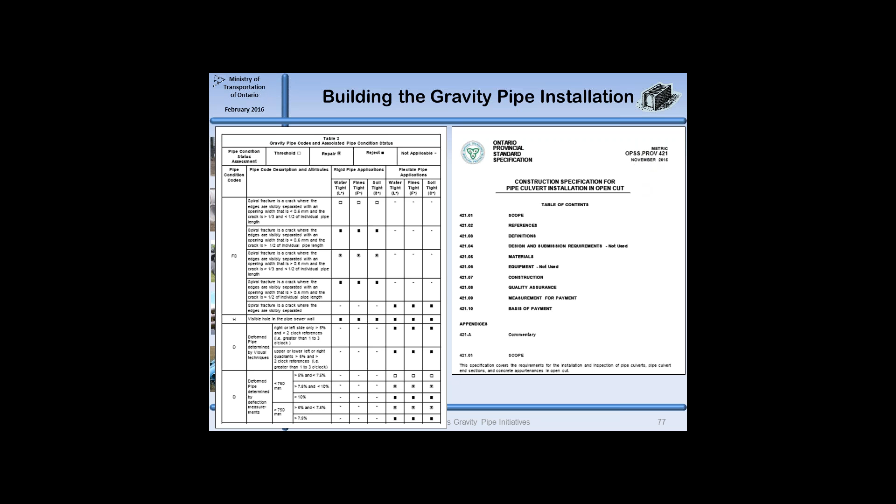We have some variations in the way we do things as far as culvert installation work goes, namely the inspection side, and we have two different types of standards for this. The pipe condition codes I've talked about come from the Manual of Sewer Condition Classification, and this is the documentation used by NASSCO inspectors. These NASSCO inspectors are certified, and they're the only ones accepted as being able to inspect pipe installations and assess them.

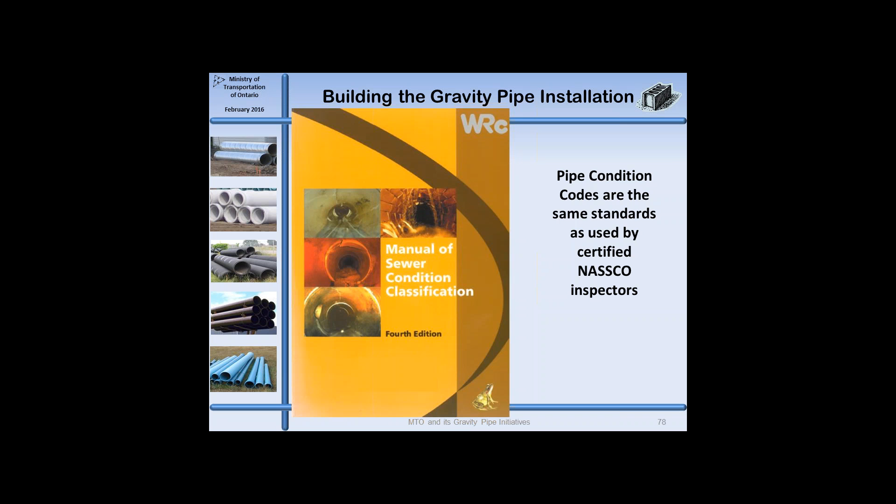Our inspections are done on a statistical basis. When we go onto a contract, depending on the amount of pipe culverts or sewer item lengths, if inspection work is required, 25% of the culverts are inspected, as well as 25% of each sewer item length. There are triggers in place, and if more than 10% of the pipes inspected are threshold status, we will initiate additional inspections of 25% more of the pipe product.

If these triggers are initiated once again after the additional inspections have been completed, we will then actually go in and inspect the remaining installations. Once the additional inspections start kicking into play, these are all at the contractor's expense.

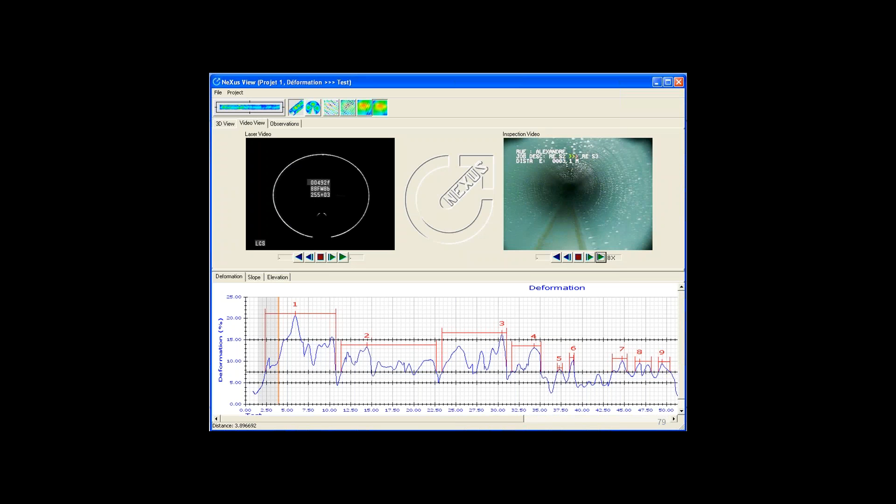What you'll see here is that we have an acceptable rating of 5% or less on this particular pipe product. Threshold rating is at 7.5% or less but greater than 5, and our reject rating is greater than 7.5%. The blue line indicates the level of deflection on this particular pipe product, and this would be one that would receive the reject status after inspection, and the contractor would be required to replace this one at his expense.

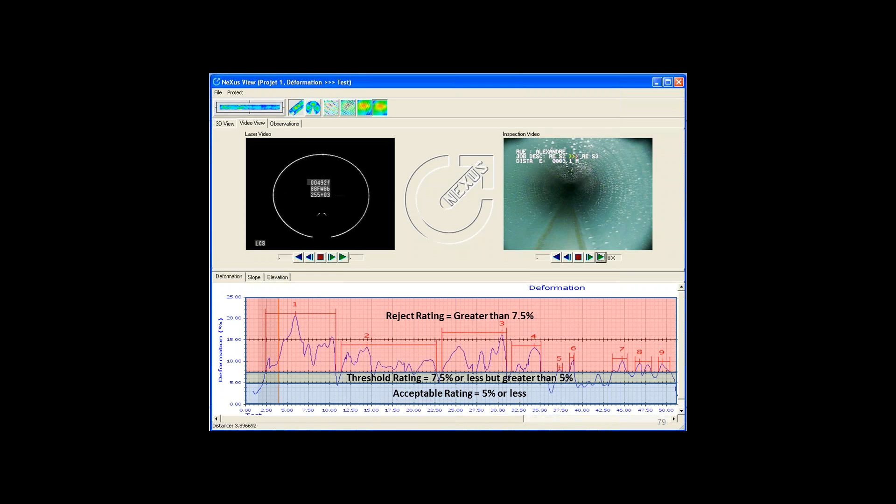Finally, having all this installed, we're into operations, and we had a look at our maintenance practices. If anyone remembers back to the initial slide where we had qualitative maintenance inspections being done, we introduced new inspection protocols and requirements in 2010. It's broken down into the elements that surround the culvert: your water course, embankment, pavement, inlet area, outlet area, and then the culvert itself based on material, shape, and joints.

The surrounding elements are rated 0 to 2, and the culvert itself 0 to 4. The 0 to 2 is relatively easy to fix, some new fill material on the embankment to take out some of the eroded area or fix up an erosion area. The culvert in itself is not affected. Once we start getting to the culvert being affected, usually tends to be 2 plus.

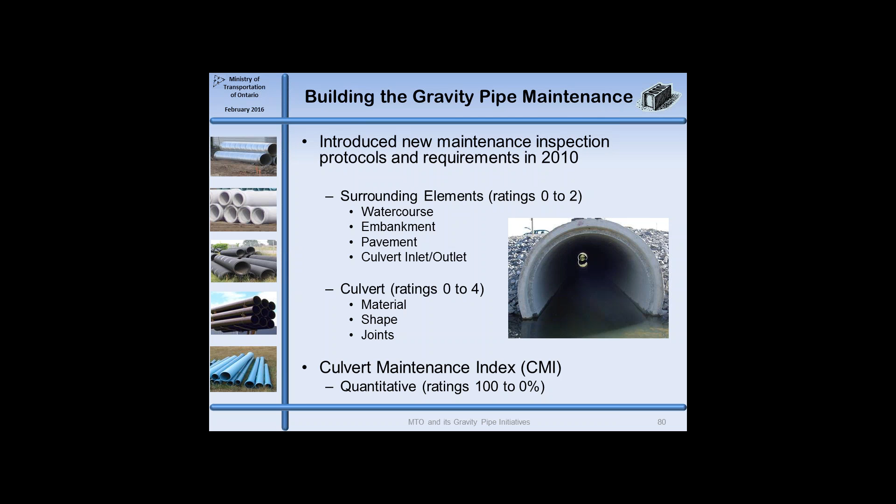All this then is transcribed or transformed into what we call a culvert maintenance index. It ranges from 0 to 100%, and it's a quantitative basis. It gives us more of a proactive versus reactive approach.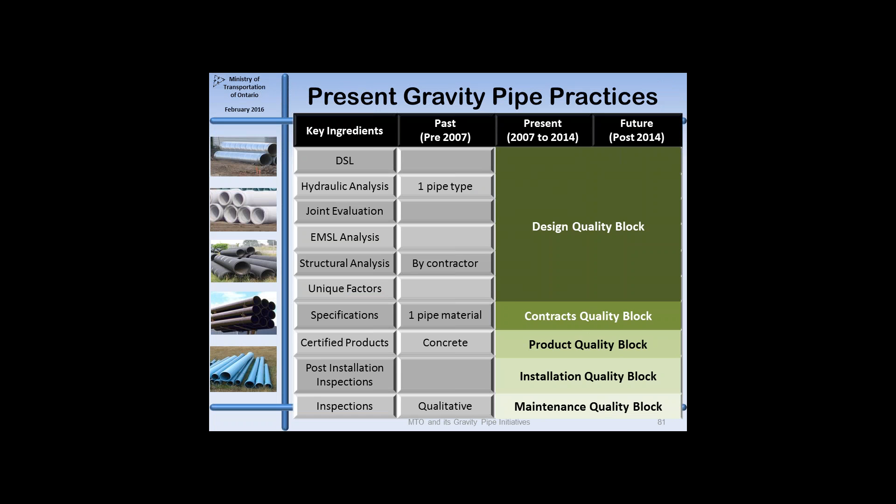Moving to where we are today, we now have our DSL set for a project based on highway class or other future contract ideas that come into play as determined by the design team. From a hydraulic analysis perspective, we now require both smooth and corrugated pipes to be analyzed, joints based on site needs so that we can make sure we get the appropriate type of pipe joint into the site location. We now have an estimated material service life analysis requirement to identify what suitable materials can go into a contract. There's structural analysis.

That's now done by our design team, so that we have the suitable materials once again put forward. Unique factors have to be assessed by the design team and any changes made appropriately. With the contracts themselves, once we move into the specifications, all suitable materials are now specified in the contract rather than just one pipe material. At times, depending on the situation, you may see only one pipe material specified, but for the most part, we want to make sure the design team has looked at all the different materials and deemed their suitability based on the design process. Certified products: every pipe material installed on the ministry contract has to be certified instead of just the one in the past.

Our post-installation inspections: we now have acceptance standards in place, so all contracts do require some inspection work. They'll have to pass the acceptance standards or price adjustments may be imposed. And finally, from our maintenance inspections perspective, we're at a quantitative state in that we have a CMI to work with, and we now have a little bit better direction as to what kind of action is needed.

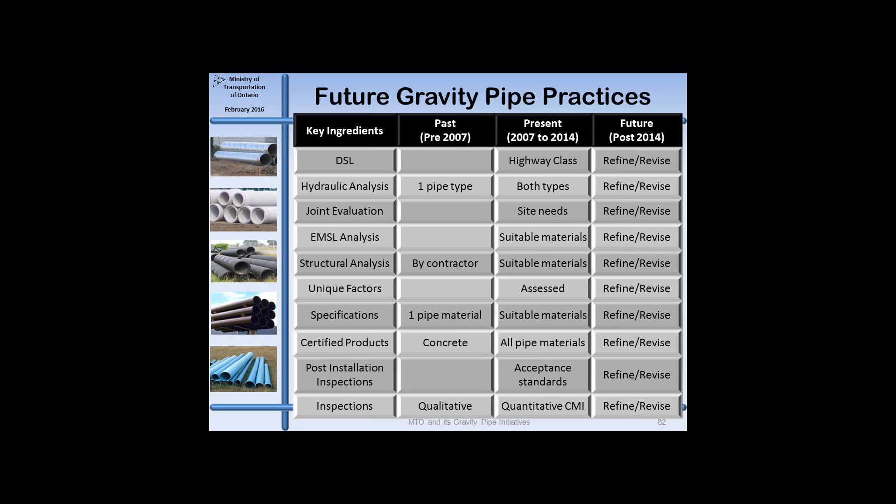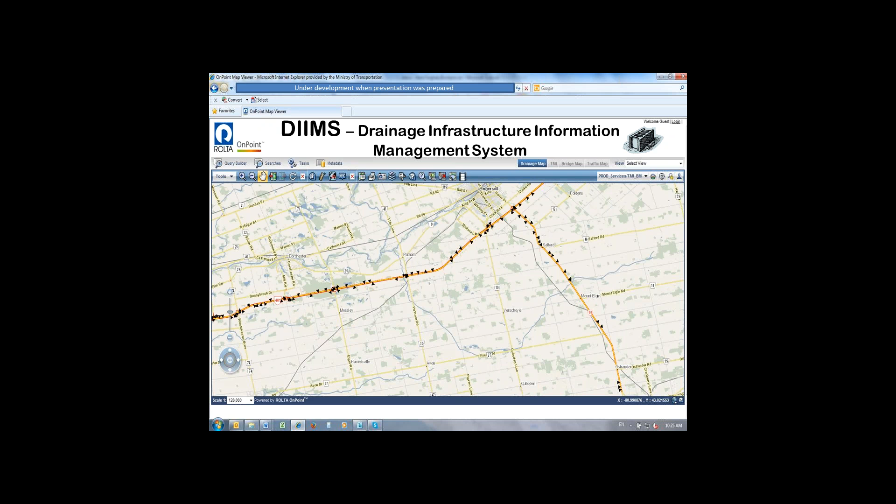One of the ways we're trying to gather information now is what we call our Drainage Infrastructure Information Management System, DIIMS for short. It's a data warehouse of information, and we have a mapping interface where we can display our culvert locations on our highways. One of the elements we've built into this is that it's a sustainable inventory, not a snapshot inventory.

Our maintenance information is collected in a required format by our maintenance contractors, and at the end of every year that information is put forward as a deliverable to the ministry, and we upload it into DIIMS. This is done on a yearly basis. Design information is uploaded at the end of each contract or assignment, so we'll have design information available at any given time.

The construction information is what actually is built. From design, we put forward potential pipe material alternatives and other choices, but the contractor will only install one type of pipe material, in one method. We want to know what actually is built - that's the construction information, inclusive of post-installation inspection results, uploaded at the end of every contract. This way we keep our inventory data up to date, at most about a year out of sync with what's actually in the field versus what we have in DIIMS.

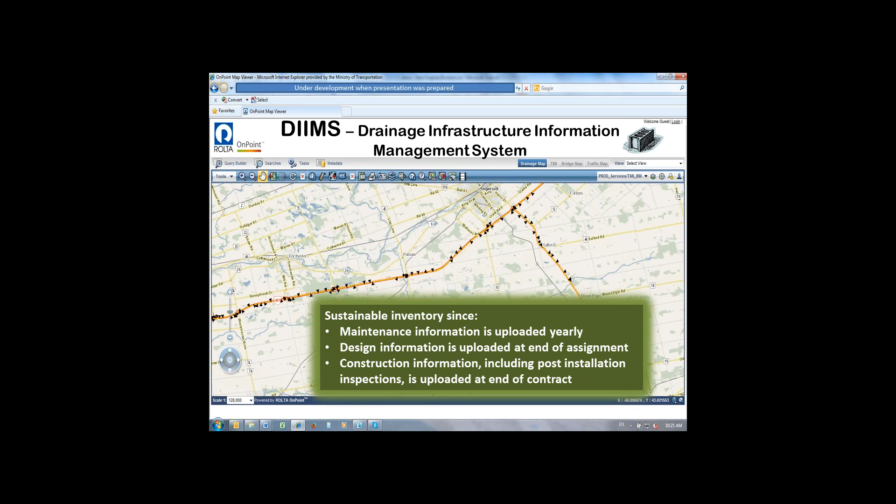We can move right down into the actual culvert locations and see what's in place - box culvert, arch culvert, circular culvert, the type of material, when it was installed, and other parameters. We've also built in hyperlinks to the design reports or studies, and any photographs taken are also hyperlinked to these particular locations.

What that will help us with in the long run is better asset management and planning. It gives us an information knowledge base about what we actually have out there in the field, because as I said, we're estimating approximately 50,000 culverts, plus or minus 4,000 or 5,000. This way we'll have a better handle on what we actually have out there, and better scoping opportunities.

One of the main things we also see from this is that we'll be able to assess our pipe material performance, and ultimately the results will determine whether or not we need to refine the design guidelines, and if required, that would be the action taken.

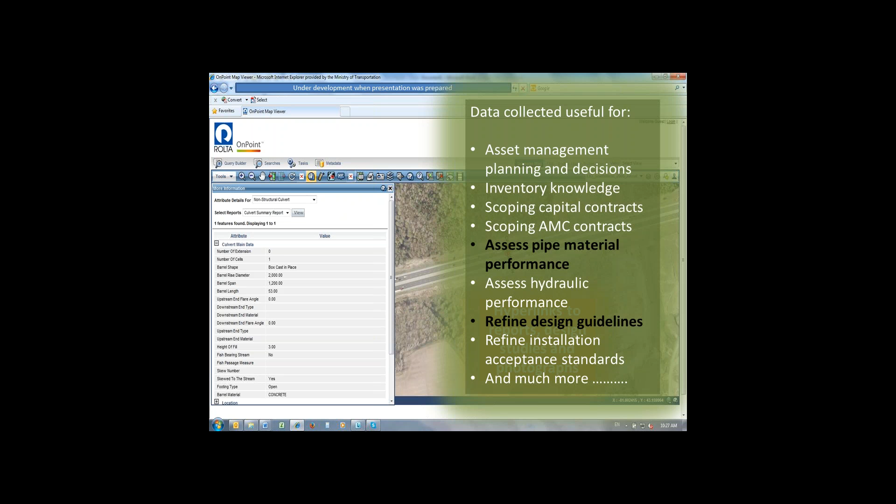We've been working a bit on coming up with some design support tools - a particular software program based fundamentally on the gravity pipe design guidelines. There's a lot of information that goes into these quantity sheets, and we may have numerous sheets in a contract. Certain contracts I've seen have up to 90 of these quantity sheets.

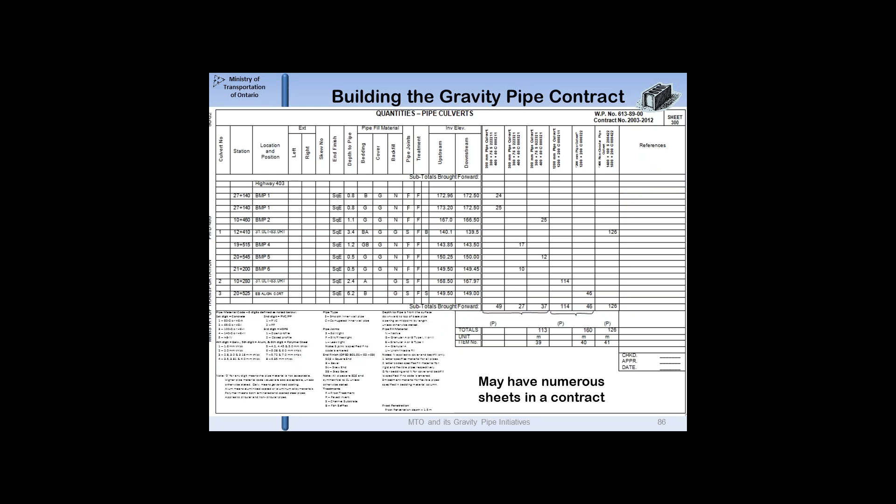A little bit giving an idea how our post-installation inspection works. As you can see, once I find my arrows here, there's an individual pipe in this location of the form. There's 31 meters of threshold length, 11 meters of acceptable length for the whole culvert length of 42, or sewer in this case, and that gives a weighted price adjustment factor of 85.24%.

Down below here is that we've inspected 2 other pipes. So once we take all those results into play, the actual weighted price for the item is actually 98.05%.

It's now up to the contractor to make the choice whether he wants to voluntarily replace this pipe and try to get a better installation to improve his weighted price adjustment factor, or given that it's at 98.05% for 1,240 meters, he may wish to, or it's not worth taking out and replacing. He accepts 98 cents on the dollar for the work that he has done. This is left up to the contractor.

The contractor also has the option of requesting a referee inspection, in which case the results of this inspection become null and void. A second inspection firm is brought in, and those results become binding on both parties. If they're the same or worse, the contractor pays for the inspection firm, and if the results are better than what we had initially received from the first inspection firm, MTO would pay for the second, or referee, inspection.

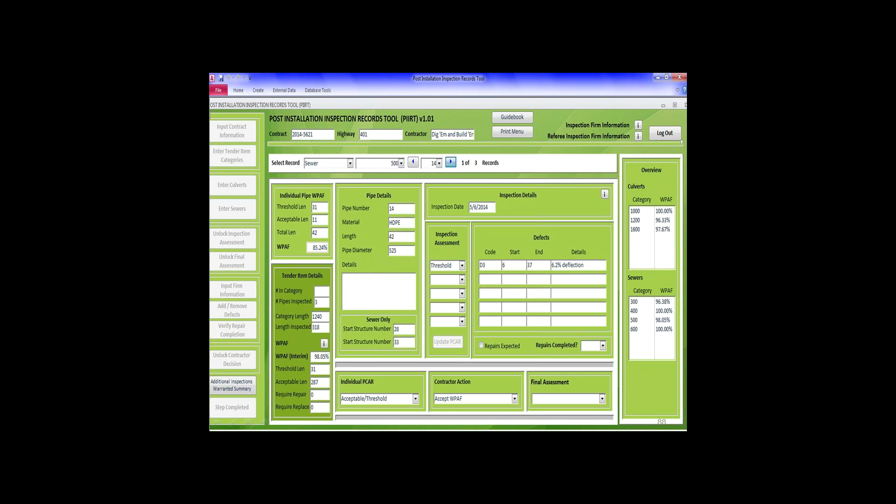A little bit more towards the future of where we're heading with some of the gravity pipe design work. Right now, we're starting to look at the trenchless focus of gravity pipe installations. So we have different opportunities. We've identified about 20 different methods out there in addition to open cut or direct burial.

Placement is different from replacement in that we're now putting pipes where no pipe existed. Replacement is putting new pipe where a pipe existed.

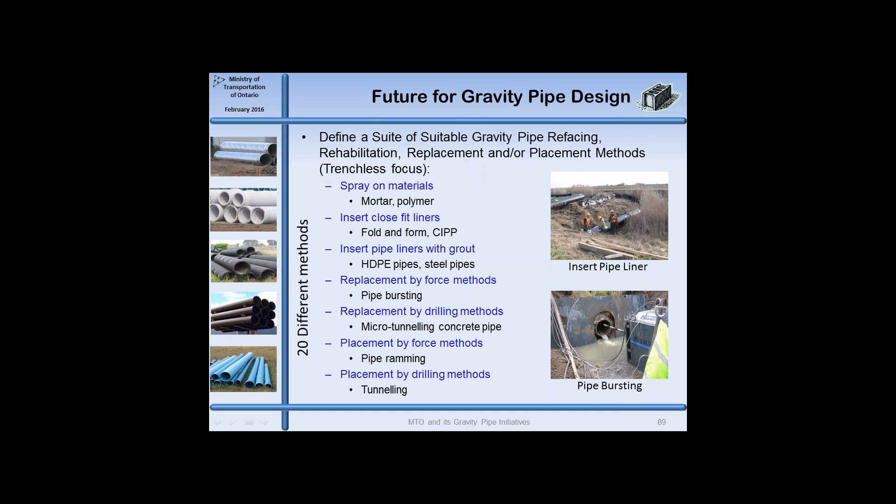Once we have all those different technologies evaluated, we're developing design guides for these at the present time. This particular study started with the first 7 in December of last year. We're starting the second assignment in May of this year, and the third one in November of this year. It will be complete by November 7, 2017, and the construction material specifications shortly to follow in 2018.

Out of the information gathered from our design guides, they will also be developing the method selection guide. So based on site performance needs, long-term fix, short-term fix, what are the hydraulic needs, ecosystem needs, and parent pipe condition, what's the integrity, what's the alignment, embankment condition, do we have a lot of voids or no voids. The process will help designers go through and select, based on the science, knowledge, and experience of the day, methods that they can put in a contract for a contractor to install our gravity pipe systems with.

And that would give the designers an indication of whether we need to fully replace the pipe, or whether we have to fix the voids first and then replace the pipe, or align the pipe. This is a whole process that the designers will be able to go through to determine which method is best suited for the particular construction site.

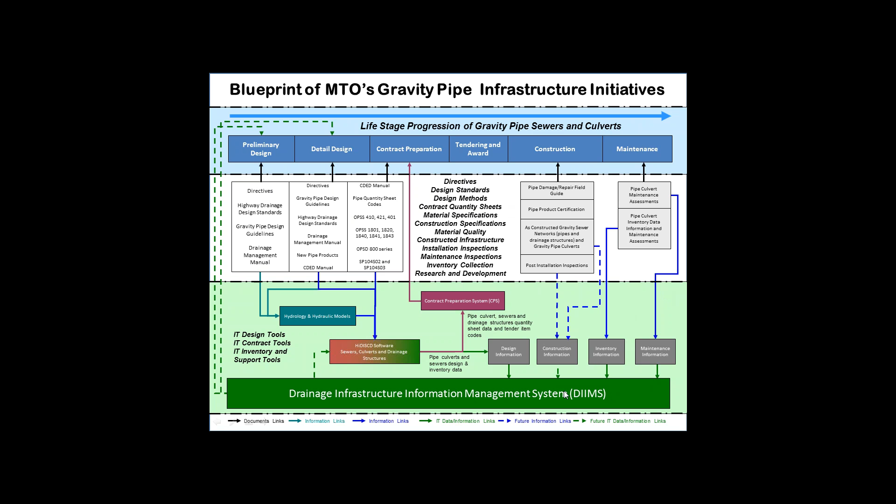Our IT support area is down below, and with the IT side we're also looking at connection or transfer of information from these different activities into our DIIMS system. So really, the upper portion is the quality building blocks I've been talking about throughout the presentation. We have our user documentation support that's been developed over the last 14 years or so, with more to come, and we've also been identifying what type of user assistance support is available from the IT world.

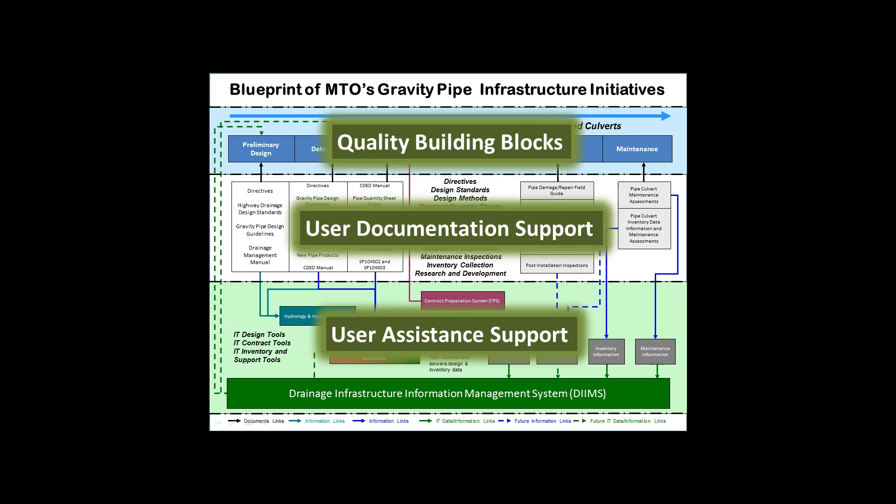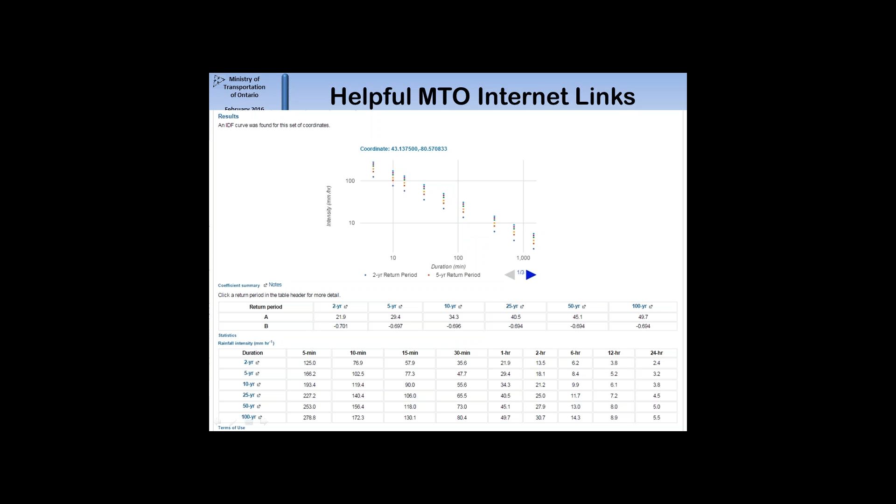This is the IDF curve. It's an online tool. You just go to the location in the province of Ontario where you wish to have some rainfall information. Here I just clicked on the area close to Woodstock and Highway 401, actually on the 403. From there, when you submit that information, it generates the intensity duration frequency curve for you, as well as the return period coefficients that are used in the two-parameter regression equation to determine flow rates.

So at this point, I'm going to turn it over to Ray while we get set up to start receiving some of your questions.